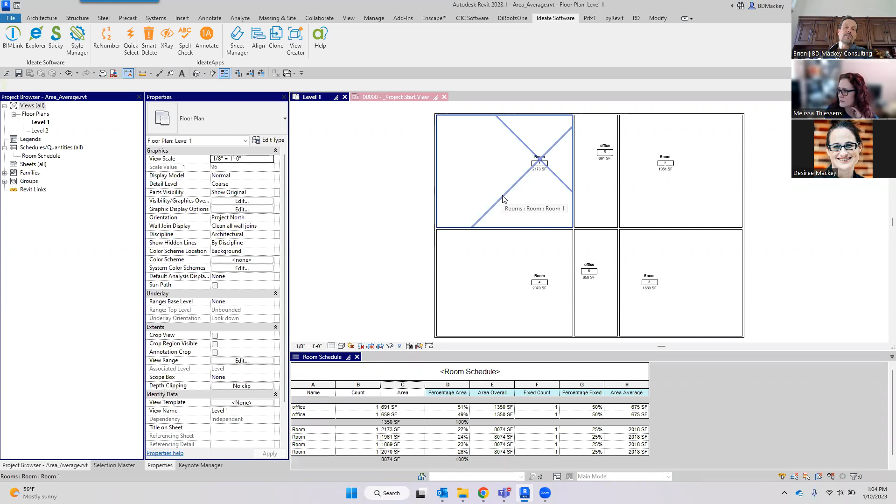And this comes back to that post from over a decade ago: you can't use the overall totals in these things. So looking at this, I've got four rooms called room, and 2 of them called office, right? I've broken those down in my schedule. In my schedule, I am sorting and grouping it simply by the name, and then I've got some totals to calculate the totals of each of those.

Like when we're doing our occupant load calculations or plumbing calculations or anything in Revit where we want to use the overall math to figure out a calculation, we can't do that in Revit natively. So to get this to work, we actually need to figure out what percentage of the overall grouping this 1 square footage is. Once we know that percentage, we can then multiply by that percentage to get the overall square footage.

And it does look a little bit weird when you start looking at this: oh, gee, I see 1350. That's the sum down here, right? You see that on every single one of these. But again, if I go to sorting and grouping and uncheck itemize every instance, now you're going to see, oh, here's the whole overall 1350.

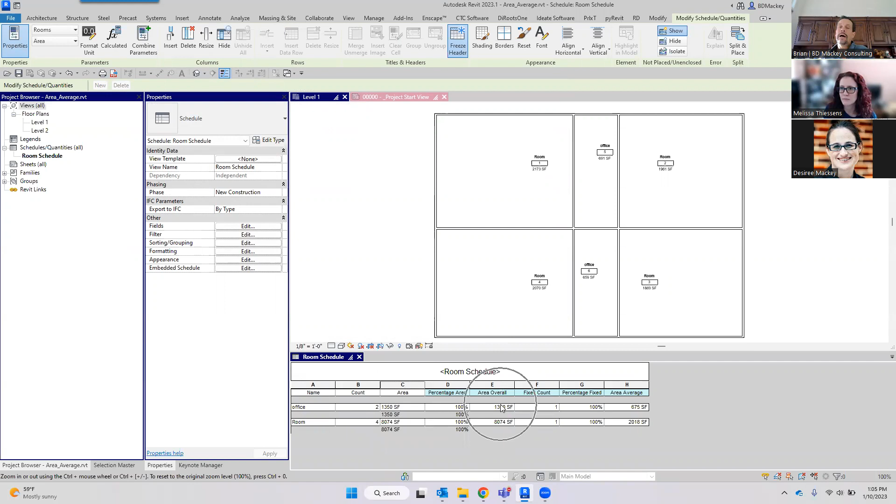Now I see that 1350 here. So in the overall area, I'm summing the totals. This one, I am not. So the question might be, how does that happen? Well, the biggest thing you need to do in Revit is create some calculated values.

So all of these last 5 columns you see here that I highlighted in blue, these are all calculated values in the schedule, right? So the schedule is only pulling out the fields, name, and area. I pulled out count as an example, how we can't use it for the next step, but the only thing I'm truly using is name and area, right? So we then have to come in here and figure out what percentage of this when we go in there.

So when you go create a shared or a calculated value, give it a name, and then if you've ever noticed, you can choose between formula or percentage. Now, once you choose percentage, the first thing is going to be any of the other calculated values you have or parameters that you have inside of here. So the first of is going to be, hey, choose from one of those parameters. And in this case, I want to know the area.

The by is then going to either give you grand totals, or the option you get here is how you're sorting and grouping it. So this is one I know causes a lot of people confusion. It's like, oh, how do we sort and group, or how do we get a value for by other than grand total? Well, if I jump out of this real quick and go back to sorting and grouping, if I sort and group it by name and then by

area, you'll see that now when I go back to that fields tab and I go into that percentage, I don't just have name and grand totals, I have grand totals, name, and area. And so coming through here and looking at this, like, oh yeah, it's the grand totals, it's the name, it's the area, right? Again, if I cancel out of this, go back to the sorting and grouping and get rid of area and say none, then in our fields tab, for any of the percentage calculated values, we only get what it's sorted and grouped by.

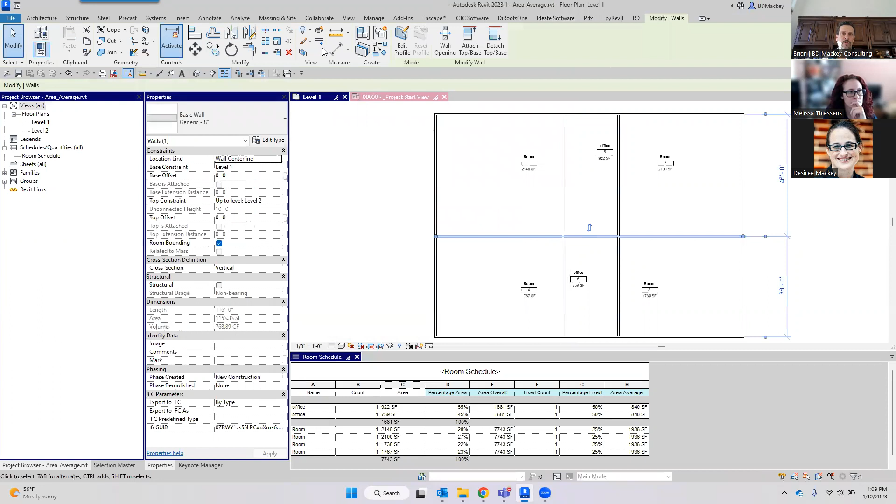And if I were to come in here and draw in another small little wall in here, let me just go say create similar, create similar is right there. I keep missing the button. I'll put this in here. I'll go ahead and copy my room down by control dragging, right? So now I've got a new office in here, and you can see those numbers automatically updated. But again, now it's still giving me that overall total as we start to come through.

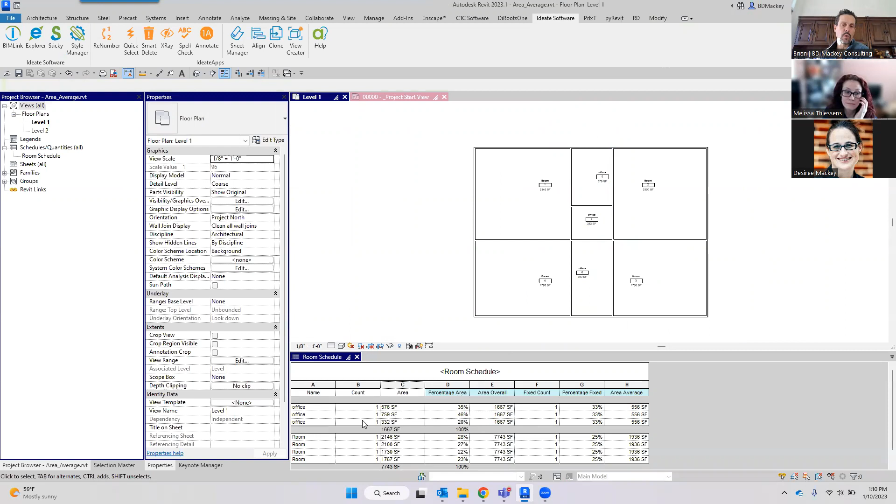So now that we've got that, when we get there and set that up, that gives us that overall area. And that's one of those things if you wanted to, if I go back to my sorting and grouping, click down here, go to my sorting and grouping tab. In sorting and grouping now, if I uncheck itemize every instance and hit OK, you're going to see I'm going to get the same for the overall total for all of the areas as I'm getting here, like you saw.

Or in Revit 23, I can't remember, did they have this in 22.1 where you get the varies in there? I think they might have. If I go back to my formatting and I say I don't want area to calculate totals and I say no calculation, now it's just going to say, hey, this varies, but the overall area is this as well. So however you want to look at it, you can do that.

So then to figure out the average of those, what we needed to do is use the count field. Unfortunately, we cannot in Revit use count as a calculated value, just like we couldn't do with the sum of all of the areas, because each one is an individual element. Count for each individual element is always one. In this case, I particularly wanted that. So what I do is I have another calculated value, I called it my fixed count, and the formula is this is always one. There's one room every time I place it. So regardless, I'm going to give myself a single value there.

So the only reason I needed to use the fixed count or to have a number 1 in every single one of those is I now need to know, again, what percentage is this. So again, I'm going to go and uncheck itemize every instance. And then I'm going to go back to my fields tab and show you the next one. So the next formula is percentage fixed. And again, I'm saying, take that fixed count, the number 1, and what percentage of that is, by what I'm sorting and grouping it.

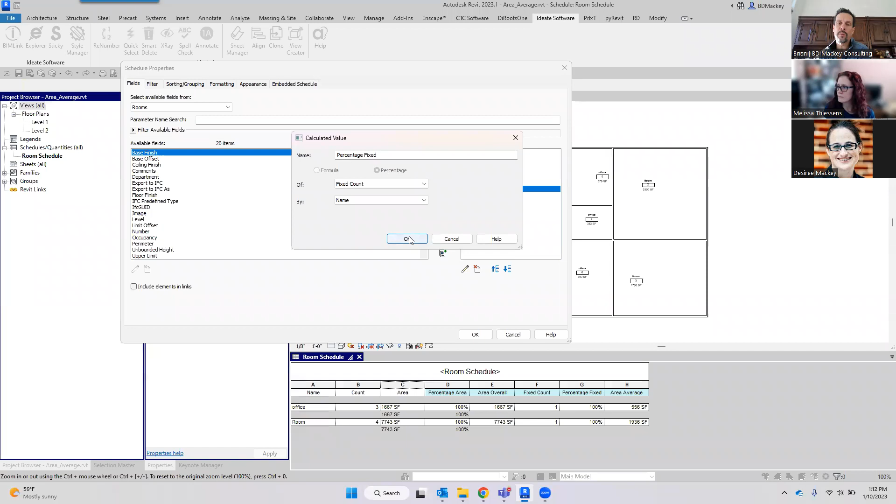So even though this is a number 1, what is that percentage of however many of these are in the sorting and grouping? So if I say okay to this, you'll see in this case I have 3, so it's 33%. In this case I have 4, it's 25%. Again, if I were to break that down and start adding it, those numbers are going to change. The reason why I need this one is for the averages, right? I need to know this percentage is 33% of the 1667. So what that's going to tell me is the average, regardless of what your square footage is on each individual one.

So again, I've got the percentage fixed, which I did the same as the percentage for areas, but it's just 1. And I guess I could have technically done this different. I could have went into that field. I just thought of this off the top of my brain. Instead of using fixed count here and percentage fixed, I could have just said no, because I needed it here. Never mind, I lied. Scratch that.

So I've got that. And then I come back here to the area average. Again, same thing. I'm just saying now take the area overall, multiply it times the percentage fixed. So take this overall area, the 1667, multiply it times whatever this is, and then that's going to be the average area.

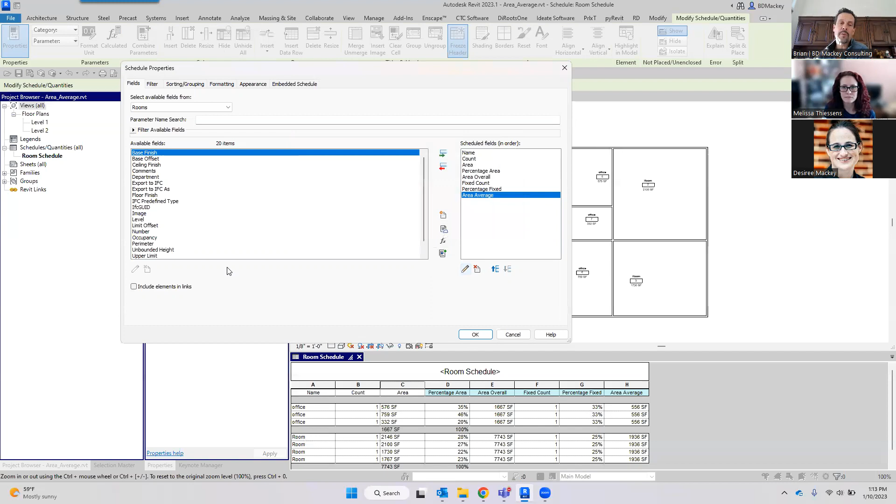If we really were getting into something where we've got typical unit 1s and we want to know the average area of that, not of each individual one, and we were setting this up on a printable schedule, I'd go back to my sorting and grouping. I'd uncheck itemize every instance, hide every single one of these columns. Boom, boom, boom, hide. Now I'm just looking at, here's my rooms, here's my offices, and here's their average square footage. So you can absolutely do that, pre-build it in.

I did a little Google searching, and there was a whole bunch of people saying you've got to use Dynamo to do that, you've got to run the Dynamo script. And I'm kind of like, no, you actually don't. You just need to come in and use percentages. So it helps to be married to somebody who knows math, or to know people who post math formulas in the forums quite often.

And I'm still trying to buy time because we only have one question so far. So, Melissa, how else do you guys kind of use this stuff in your template when you're starting to work on it?

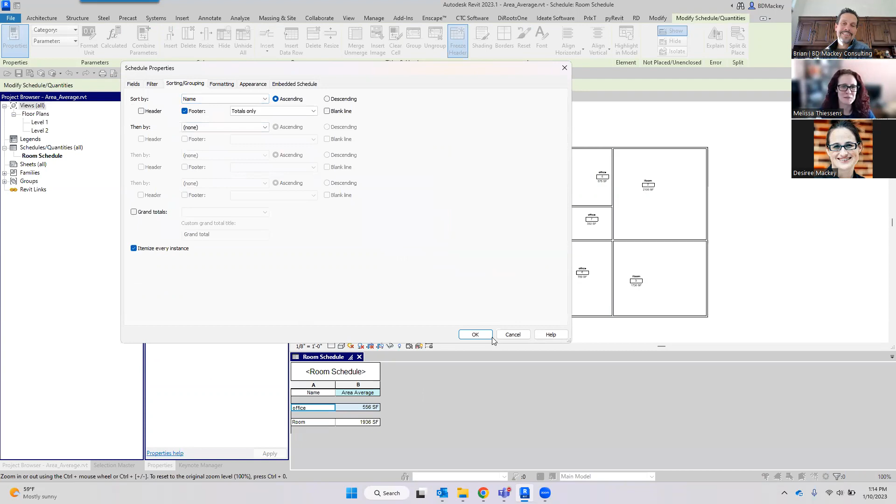Very similarly, but also with Dynamo, because John. You also use Dynamo because, well, not all of us have John. Yeah, it also helps to work with a John Pierson when we're talking about that and getting into it.

No, we do very similar in our code stuff, and have that stupid count parameter. The fixed count parameter, you don't necessarily need all of the time. Like if I'm just trying to figure out the overall area, that's not one that I needed. It was funny, I did this in one of my fields and I had it in there. I went back, looked at my schedule, and I'm going, I'm not actually using that in any of the other formulas. Why did I put it in here? It was just such a habit on certain things you do, it's like, yeah, I needed that. So I basically do these 5 fields all of the time, I just put it in there, and I'm like, wait a second, I was only using these 2 fields, I didn't need that fixed count.

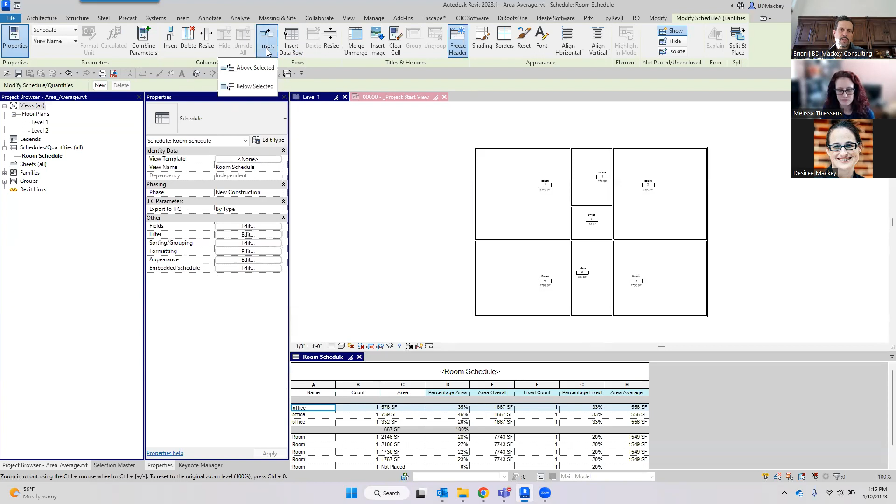But again, I want to reiterate to people that you want to put some sort of note, like if you have this in a working schedule, add a new row up here or something, insert below, put something in here. Do not change the grouping, sorting, whatever. Make it something big so people understand, hey, this truly is what we need to be doing so it doesn't break the schedule.

Since we did mention John Pierson's name, I do want to mention, and Melissa was jealous because John released this like a day or 2 ago, and I've already had 2 updates to it because I noticed a couple bugs. I always get asked, how do I get my colorized tabs? You might notice when you look at this that I've got the colorized tabs, but John's latest update colors the properties in the project browser to be the same, so if you switch from project to project, you actually know not only by the tab you're in, but by the property.

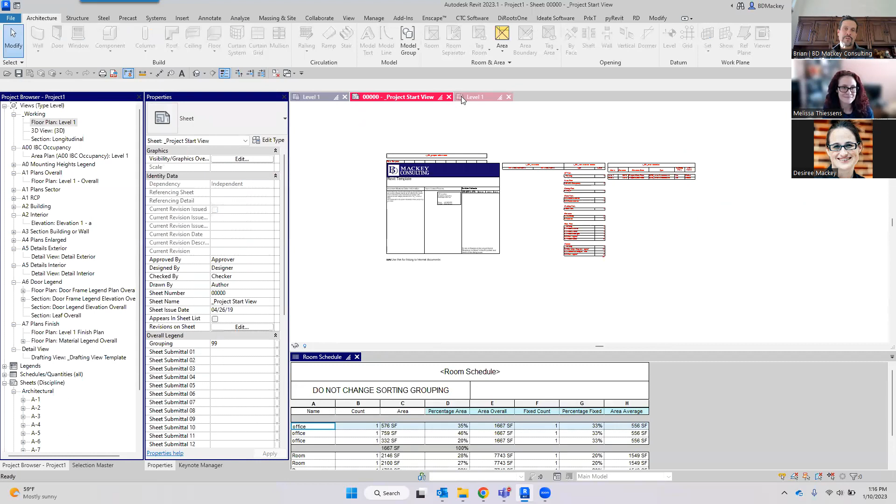Sure, it's not working. Is it because I tiled my views? Uh-oh, let's see if it's because I'm in a sheet view. Oh, I found another bug for John. Well, this is recording, so what minute are we in the recording? So I can just give that to John. Let me get rid of this and see if it goes back to being pink.

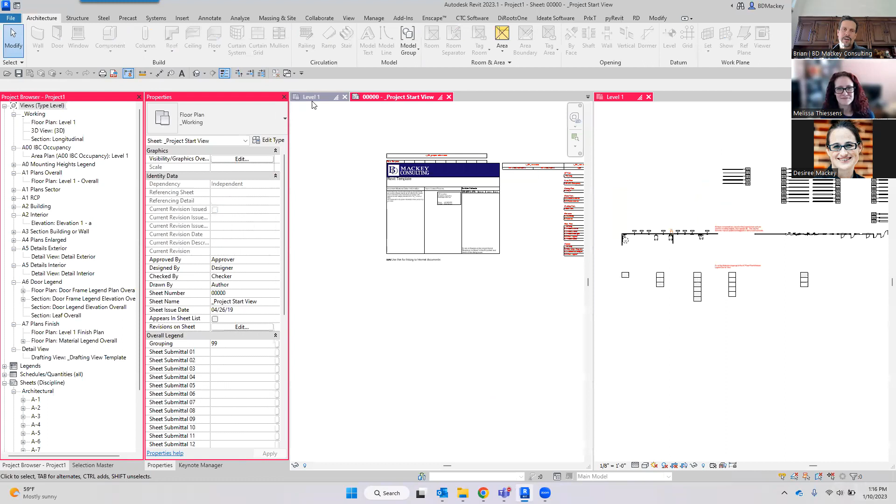Oh, it was literally working right before I started Revit Radio. No, there it goes, so if you're tiled, it's not working. It could be Zoom, we found that Zoom has been messing with all sorts of stuff lately. Okay, well, let's tile this up and let's see, tile it up over here, go back to the blue one. Yeah, not working when it's tiled. So maybe it's a combination of tiled and Zoom. Not sure, but I'll be having a call back to John, maybe I'll get a third update in 3 days.

It does go through and change it. I also have other add-in utilities that give me tabs down here, and you'll see it's still using that same color-coded border. Something about this was actually really nice looking at it, getting into it. This is very cool. I can now just use the tabs and know which properties of which one I'm getting into as I change out my different projects.

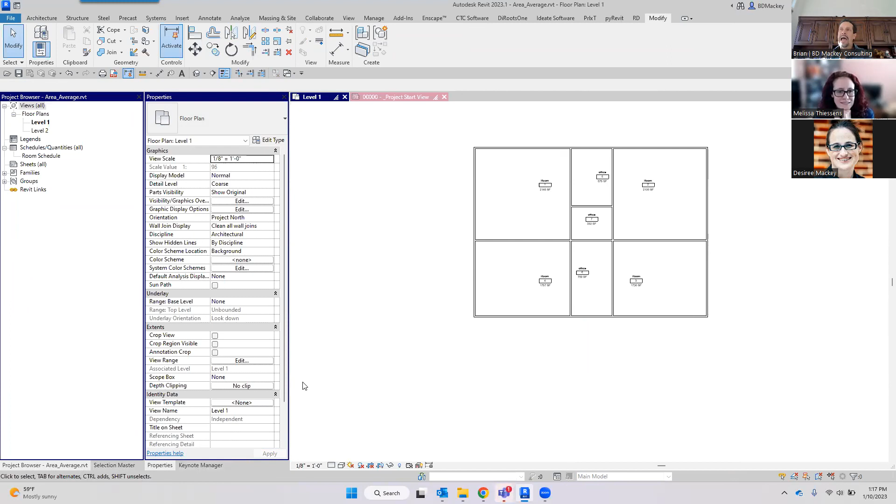Because I've done that before, it's like, oh, I'm in this project. Wait, ooh, now I got a 50-50 split here. Sweet. Yeah, I did. It also could be the fact that I have this other add-in utility that's adding tabs down here too.

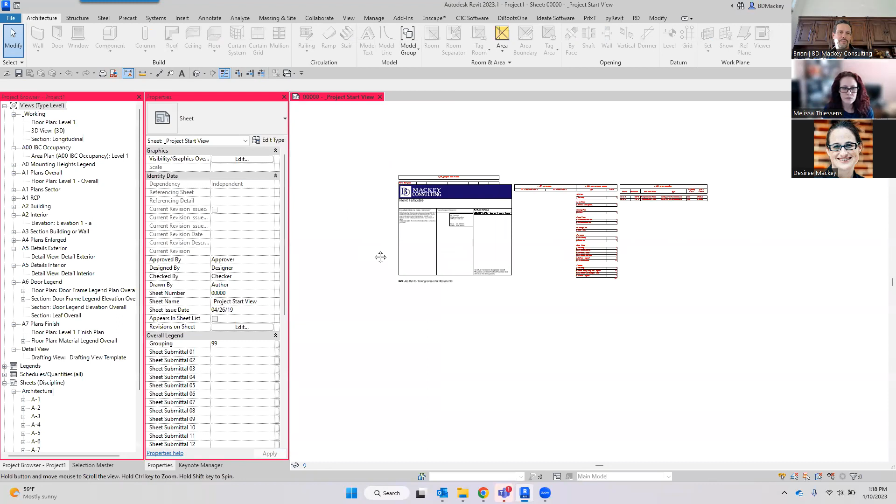Okay, so let's go to floor plan. Let's put an architectural column down. I rarely use architectural columns personally. Usually for me, unless it's going to be some sort of specific case, I don't get why they have a chamfered column here. To me that should be structural. Out of the box, it's kind of odd.

Are they not allowed in your household? Yeah, it's like if you're doing a metal clad or a Doric column, I kind of understand that too, but the round column and the chamfer column, I don't use those ever, just because it drives me crazy that that should be a structural column.

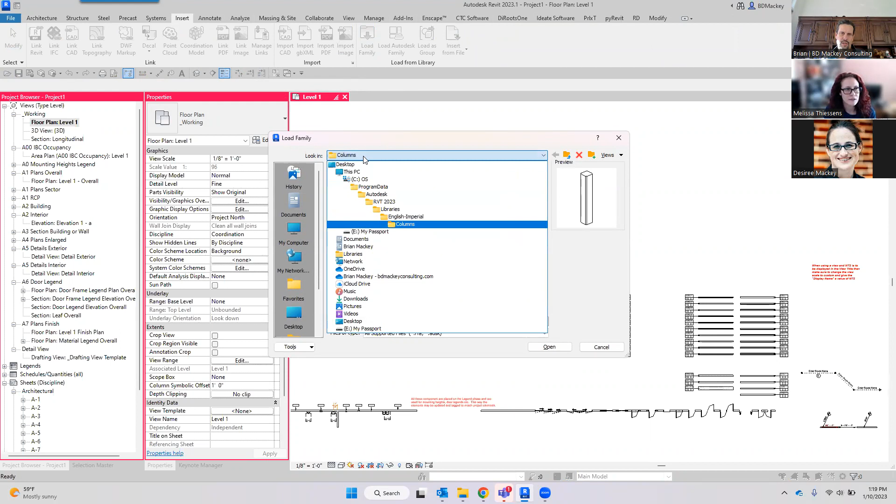Am I trying to do that again? Insert load family. I won't do it from the chamfer column. I am under just columns, right? Yeah. We'll do the Doric column. Okay, now we'll go back to architecture, we'll go to column. I swore I clicked column architecture before. I might not have. Cool.

Oh, did you guys ever notice this bug as well? Have you ever tried to place a column and it doesn't show up in your preview? I don't know if everybody has this problem, it's mostly with structural columns. It's because your level is not at 0 in your project environment. A lot of my clients start their level 1 at 100, and when you go to place a structural column you do not see the preview of it until you place it. It's because your view range is below the level you're on. It looks at whether show family pre-cut in plan view is turned on in your structural column family, and if you're placing it on something other than 0, that will not display the preview of the column. It's a pain in the ass. It is a bug.

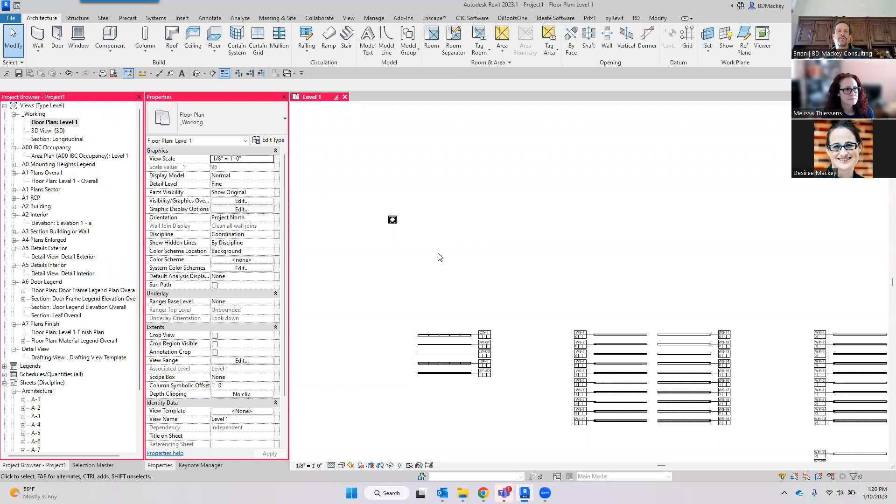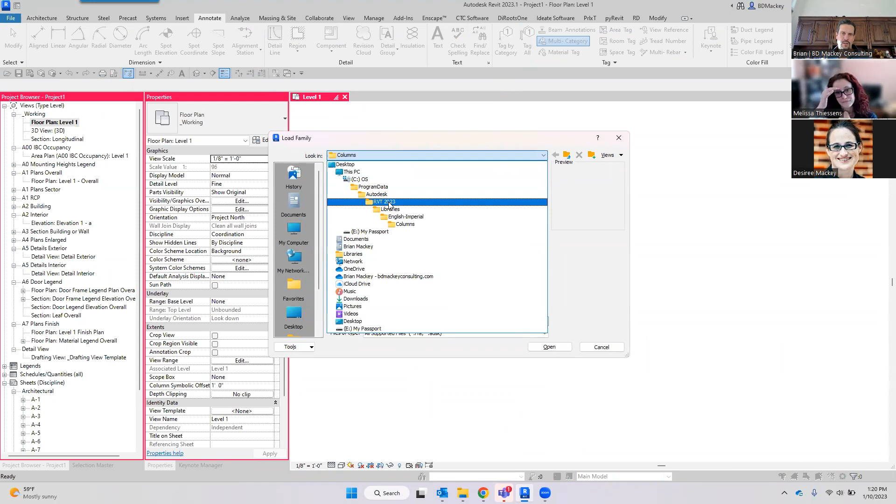Okay, so we got this one here. We're gonna go ahead and try to do a multi-category tag, get back to the original question. Tag, where am I going? Annotate. Multi-category tag, sure, I don't know. Is there an out-of-the-box multi-category tag? I haven't looked. Multi-category tag.

Okay, so it is working for me. Uh-oh. So this is a multi-category tag, I got it working for me, but I have no idea what this is tagging. I'm assuming probably comments. No, that's a type parameter. So what did I change? So it's the type mark. So what must be the problem, Rowan, is you're selecting something in the multi-category tag that doesn't exist in that family, would be my only guess.

He's blaming it, he was in Revit 22, not Revit 23. Oh yeah, totally blame it on Revit. Totally, it was just a glitch in the matrix.

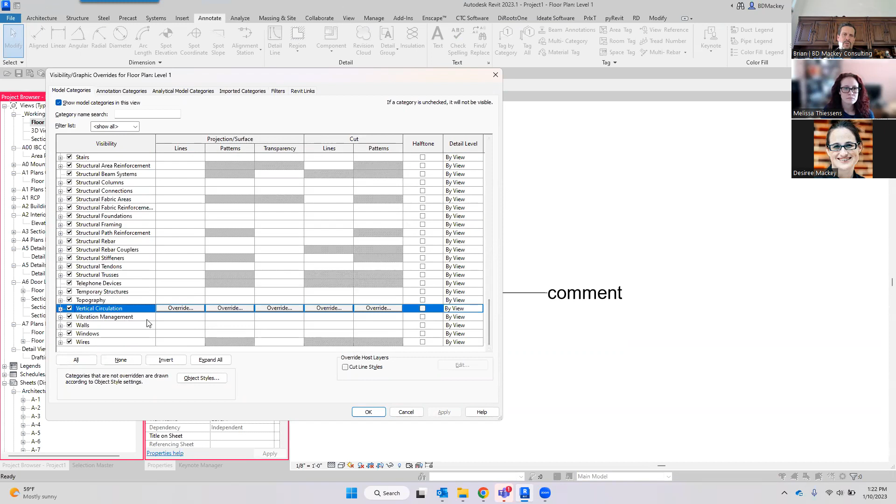Yeah, I'm not sure because I thought they were still there. They did add more categories to it, and somebody actually posted recently that the multi-category tag does not pick up on a lot of the new categories in Revit 23. In Revit 23 we got things like vertical circulation or something like that. I did notice in one of the Autodesk forums that somebody was saying some of these new categories don't pick up on multi-category tags.

Not sure, maybe they're doing the same problem, Rowan. I didn't really follow that post any further. Someone commented and I was like, huh, interesting.

It's working for me. I think you just need to check your tag and make sure it's pulling out a parameter that exists within that family. Also, I wouldn't say it was a thing that didn't work in 22 that now works again. It might have worked in 2022, but not 22.1, or 22.1.1, something like that. It happens.

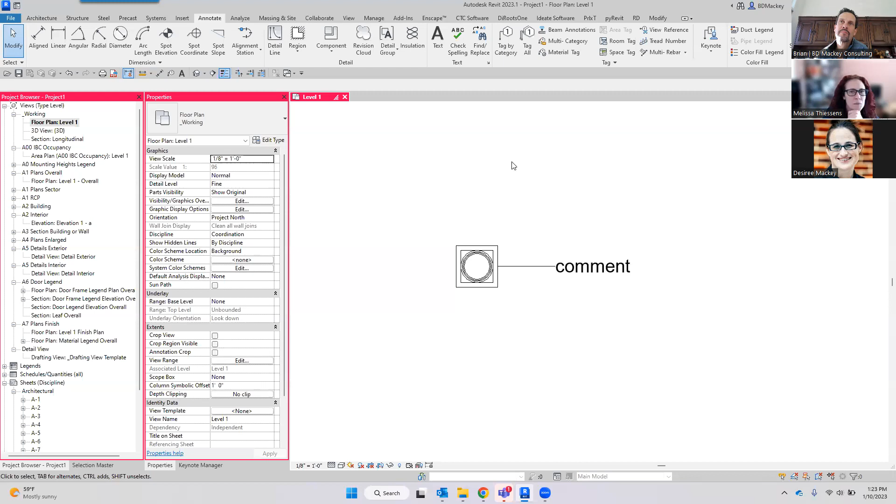Maybe you should open up 22 and just see if this thing works in 22. I can do that while we're answering the next question. I'll go ahead and open up Revit 22.

So what's our next question? Why is that taking forever and a day? That's the problem with having too many add-ins — you get too many add-ins, it takes so long for Revit to open. That is true.

So what's our next question while we're waiting for that to open? Okay, we'll go to Rick, who just posted another one: does the recipient of a Revit project file need the keynote file for the keynotes to appear correctly?

No, not until they try to manipulate something in that object. For a lot of my clients, they have the Revit keynote files — I open them up on even BIM 360, and the keynote file is not on BIM 360, it's on their server. I will still see all of the keynotes properly until I attempt to manipulate something, then it'll just come up and give a question mark. But once they open it again, it obviously repairs that and fixes it. So no, technically you don't need to have that keynote file.

Now, I don't know if that file has been transmitted — whatever we call that, transmit a model or whatever — if they do that, I'm not sure what happens. I don't even know if that brings the keynote file along when you do the transmit a file. But no, I've done it and seen the stuff come through just fine.

I've even opened up my own thing where I've lost the keynote file. I moved folder structures or whatever, and go through saying, oh, okay, it can't find it. And I still see the keynotes until I go to manipulate it. So you should be okay without having the keynote file for them to appear correctly, but I'm not sure at what point Revit's going to regenerate those things and say, sorry, I'm just going to give you question marks.

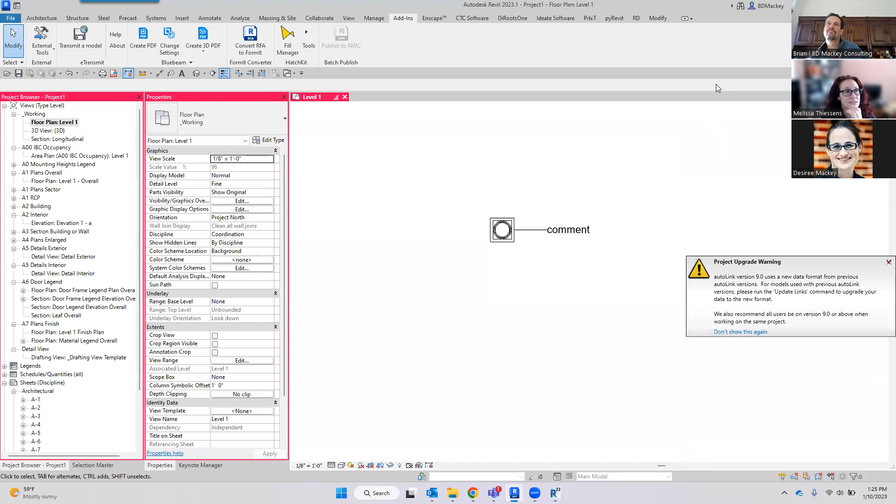Cool, so 22 I think opened. So we'll start a blank new project, not with the construction template.

Oh my God, I must have broken my INI. What? I thought I just deleted the construction template out of there. It's one of the worst templates ever, because I set my phases up for superstructure and all of that, breaking a building down.

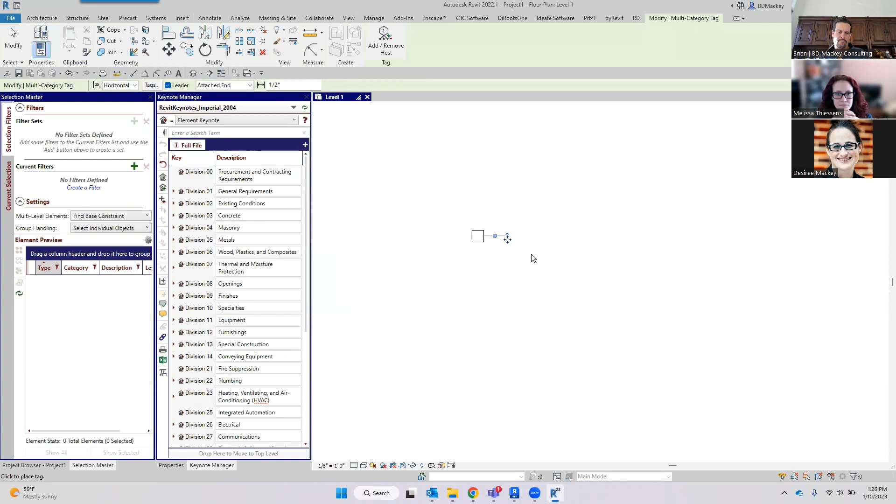Come on. Column, architecture, put one. Tag. Multi-category. Sure. Yep, just do your own. Still working for 2022 as well.

Bummer. Maybe, well, and then you can run it down. It could just be that file that you were working on. It could be the tag, could be your computer, could be the day of the week.

It could be you. I know, Dylan, I'm just trying to be nicer. It could be. Oh, he gives me enough crap when he asks questions on Revit Radio. All right, fair.

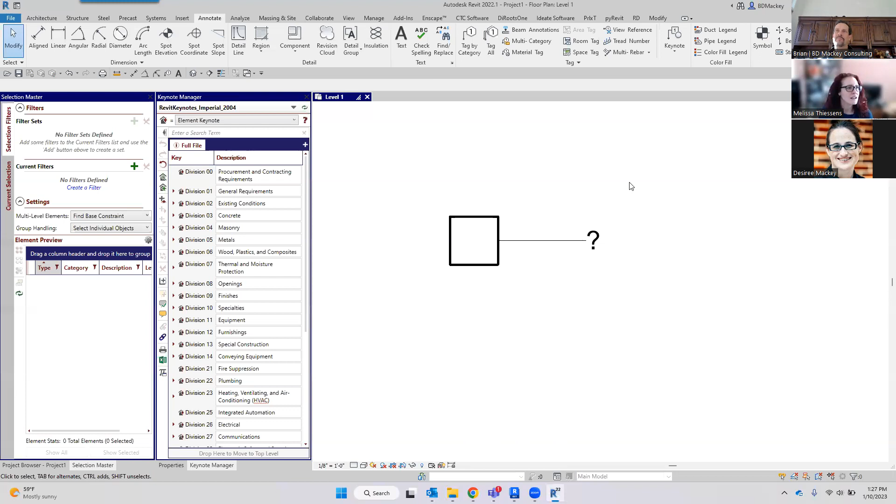Oh, look. Well, it's a good thing that you got 2022 open because we have another question from 22. Well, there you go. So Christopher's asking, is there any idea in Revit 22 when you use keynote tags, when you add a host, the leader goes out to the middle of nowhere and you have to drag it back to the component you were trying to add?

So it doesn't necessarily have to do with the keynote tag. The reason why that's happening is when you are going to tag, right here, you have your tags set to be attached end. And when you set it up to be an attached end, Revit looks for the quadrant of that family, right? So you can see that I've got this tag here. This tag is already there. It's been set to be an attached end, not a free end.

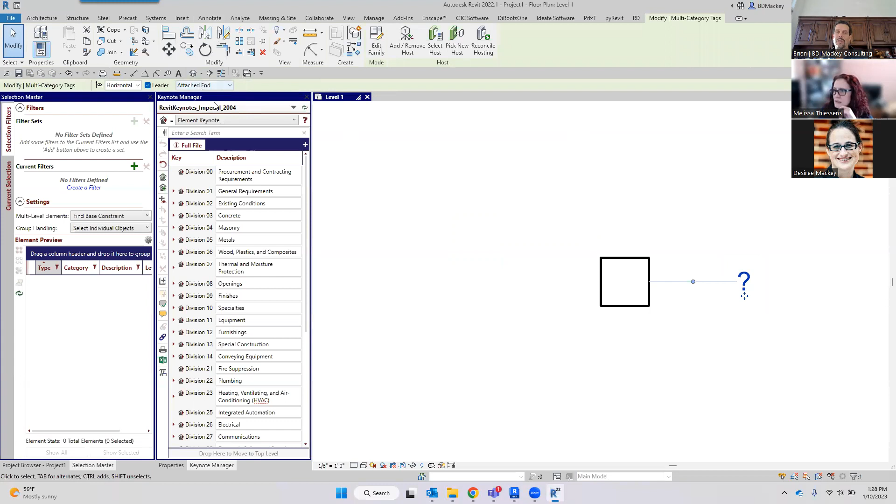And if I come in here and edit this column family, I'm going to go into a floor plan to do this. Use floor plan, ground floor. If there is something in that family, usually a reference plane that is outside of it, or it could be a reference line, whose definition is set to be strong or weak, medium, or named, it will think that's the extent of the family.

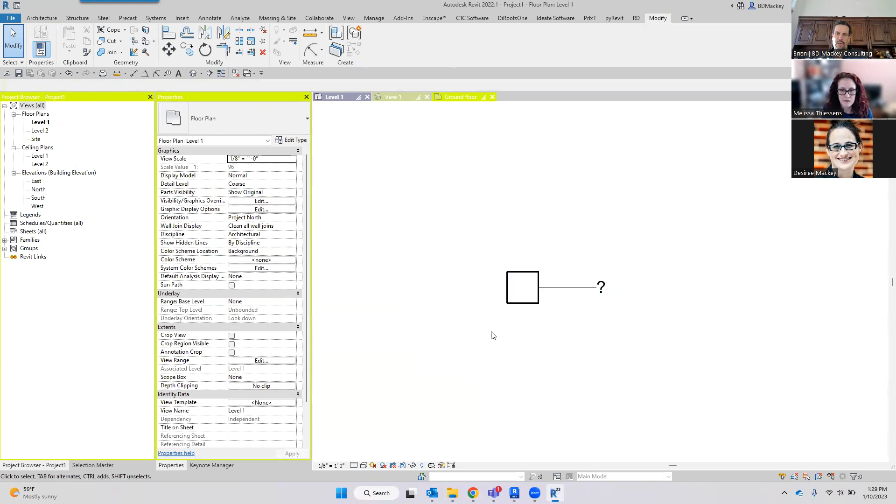So if I came in here and drew a reference plane, I believe a reference plane will break this as well. I take this reference plane here and change its properties to be a strong reference. I'm going to go ahead and load this back into my project. I'm going to override it. First off, you can see I'm grabbing that stupid column family. Wait, where is it? It's way up here. And I'm going to try to retag this.

And it might not be a reference plane that's doing it. It could be a reference line, but let me go try to tag again. Let's just do tag. Make sure my tag is attached end. I probably don't have a structural column tag loaded, so we'll go to multi-category tag again. Or you said keynote. I'll do keynote tag. I changed it to be attached end, click it here, boom. Okay, so that's not doing it, cool.

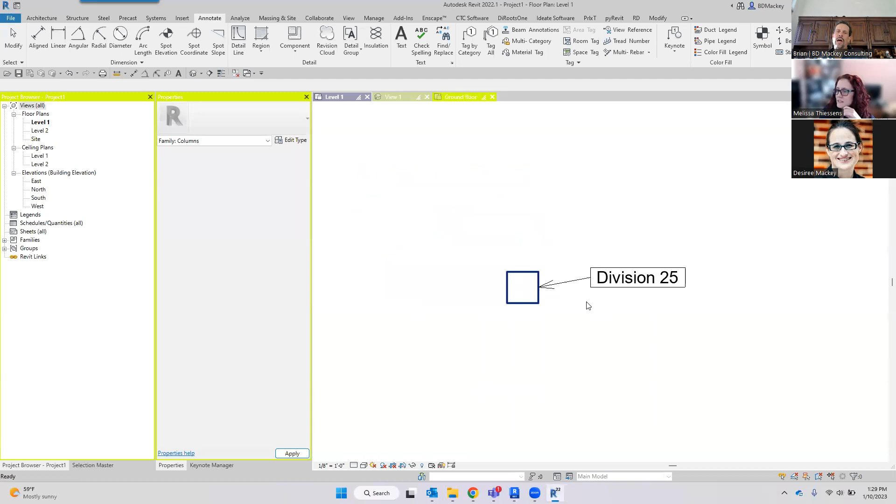Let's try it with a reference line. Create reference line, change it to be a strong reference as well, and load this back into the project. The reason it's doing it is there is something in that family that is saying, hey, I mean, you can see that the tag actually moved, but I don't know why it's not giving me. No, I did not double click you. I just selected you. I honestly don't get why it's doing that. What is it? Possibly because something's extruded.

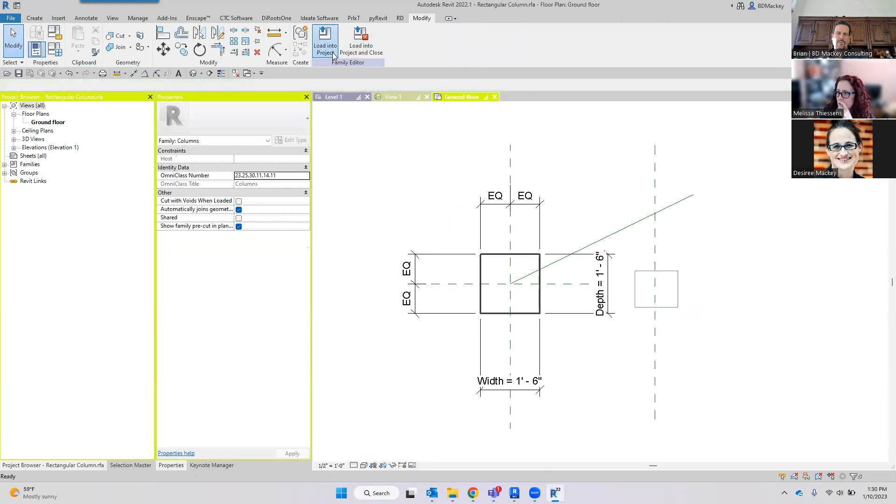It used to do it with reference planes. What if I go create an extrusion over here, finish it, but then say that's not visible for whatever crazy reason, and load that into the project. Nope. Still not doing it. I'm really confused. That usually breaks it. Maybe it's because I'm doing it with a column family and not something else. Let's try the cheesy desk. See if I can break it with a cheesy desk.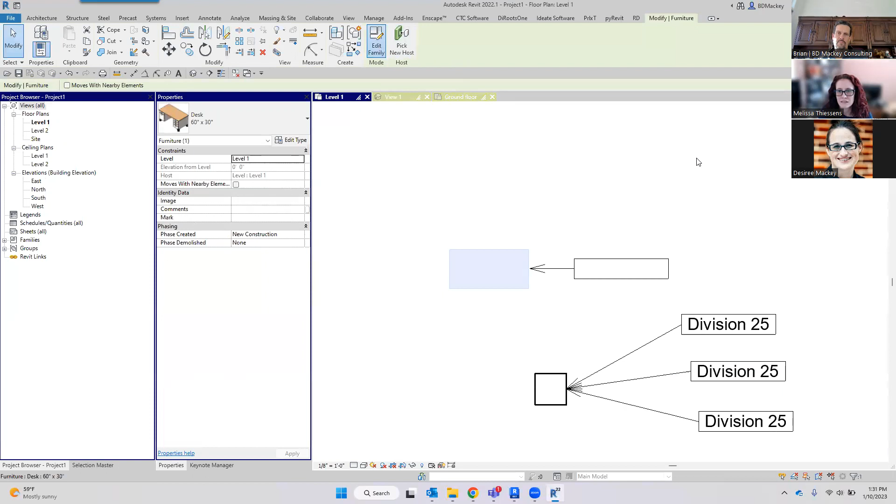And while you're doing that, some in the chat are talking about showing it to somebody else. I can confirm that that works, even for me. By the time you get annoyed enough to say, hey, watch this, it keeps doing that, it stops. Whatever it can do to make you feel like an idiot, I think that's what it does.

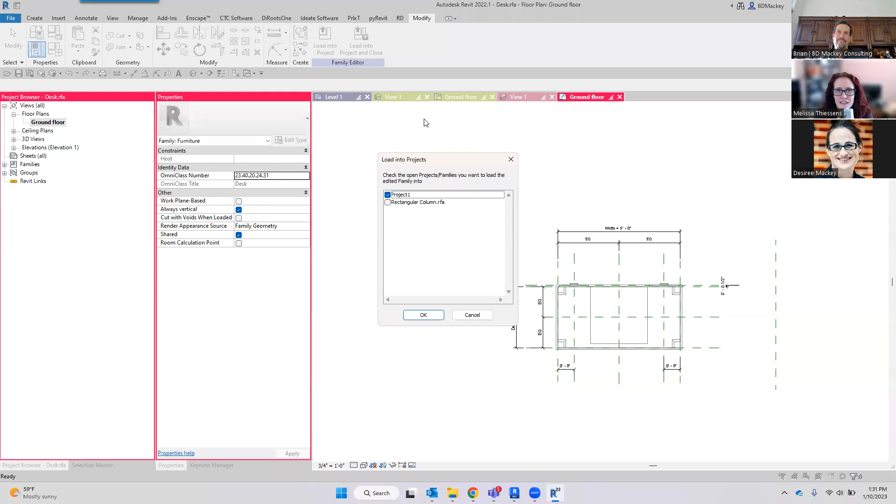Yep, load into project one. The tag's moving, the extent of the tag moved, but the leader isn't. That's weird. It's usually something to do with that, and there's something inside the family that's outside of there. Oh, you're talking if you hit add, but you can only add leader in 22 to text. You can't add leader to keynotes. Sorry, Rick said it's secondary leaders to tag a second element.

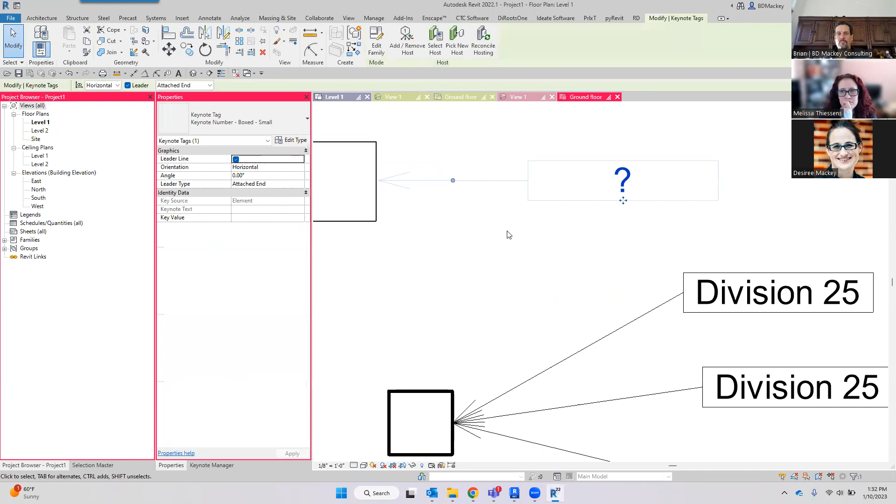You've seen the same issue. I've seen the issue too. Usually it's when I open up the family, there's something rogue off on the side of the family that's causing that to happen. Of course, I'm trying to break it now and I can't get it to break, even though you've been having it break for you for years. It's usually something like that. I don't know why I can't get this to break. That usually breaks it.

Because FreeEnd lets you move it anywhere you want. Oh, that's a new tag. So if I go to FreeEnd, I can move it. Maybe it's just when you're tagging it with the FreeEnd. Maybe that's what I'm missing. Create similar, FreeEnd, tag this, not usually. Yeah, I don't know. I got nothing.

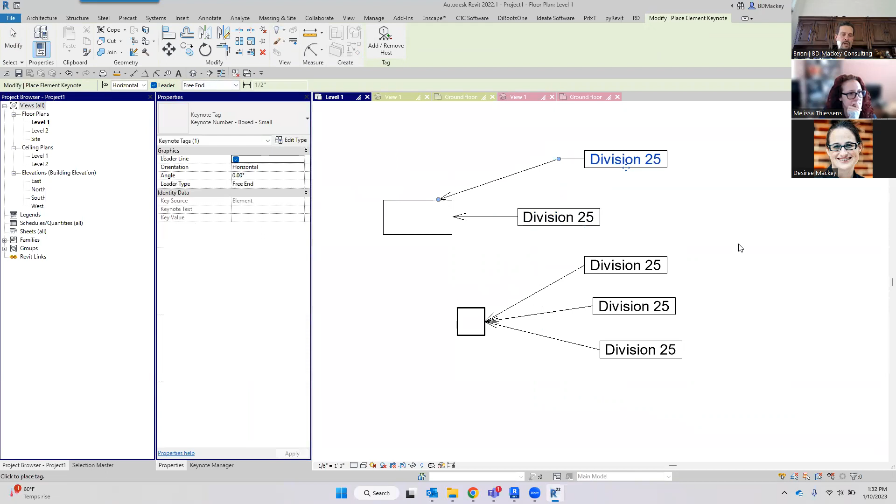No, add remove host. That was in 22. Gotcha. Is that a 22 feature? I totally thought that was 23. Add remove host, do this one. Yeah, I can't get it to break. Should really break for me. Add remove host, this one.

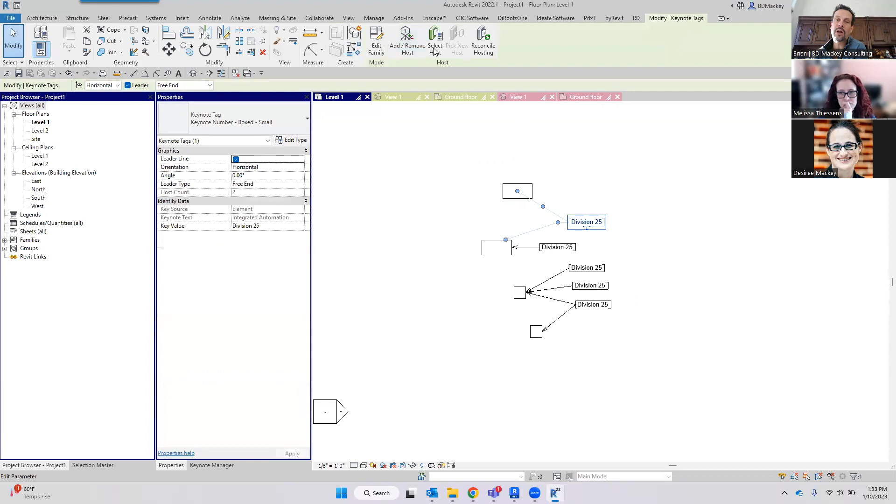Cool. Well, I would think it'd be breaking. It's not. But yes, I understand what you guys are talking about. I've seen that. Like I said, I would verify in those families that there's not something floating out there. There's not a reference plane or reference line that has a strong, weak, not a reference. I have not seen that in doing multi-tags where you can add remove host. I've not seen that happen personally. I'm not saying it's not, so I haven't had to go try to troubleshoot that one yet.

Trying to change these around back, got nothing. Can't get it to break. I hate it when that happens.

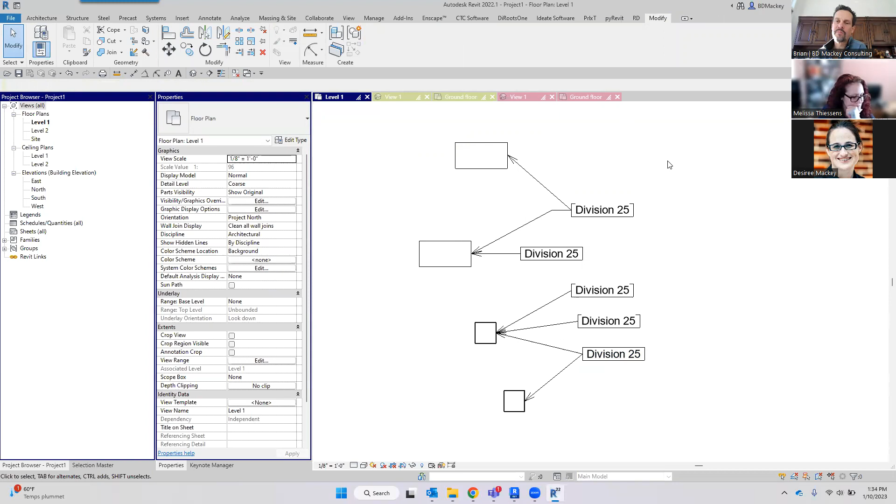So what other kind of questions do we have here? So our last question from Anonymous is how do you export shared parameters that exist in a project if you don't have the original shared parameter file? So it'll be the same if you're in a project or if you are in a family environment. It doesn't really matter. You just need to get to where those parameters are.

So in the project environment, you're going to go to Manage and you go to Project Parameters if it's something that's within the project. You'll see these are all of my crazy parameters for code, etc., that I've added inside of here. Well, if you don't happen to have one, when you select this and you hit the edit parameter button, you will get the button here to export. Mine is grayed out because my shared parameter file has this one in it already. So if I cancel out of this and I go up to my shared parameters, I'm going to point to a different shared parameter file.

Sure, we'll try that one. No, that one probably has it as well, but we'll see. Manage project parameters, come into here, grab this, say edit. Cool. Well, that client has my shared parameter in there as well. But so normally you would just get this export. And then once you run that export, if you then go open up the shared parameter file you pointed it to, inside of there, you will get one here called exported parameters.

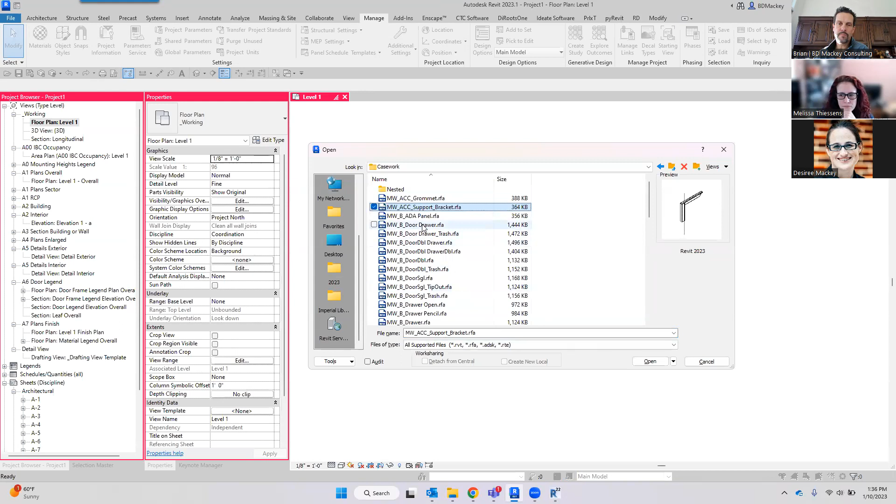So if I open up a family, the only difference is you're not going to go to manage project parameters. Oops, not the button I wanted. You don't get project parameters up here. So what you're going to do is go into your family types and find something that is a shared parameter. You won't actually know if it's a shared parameter or not, but if I hit modify, it'll say shared parameter, and then I would get the capability to export that.

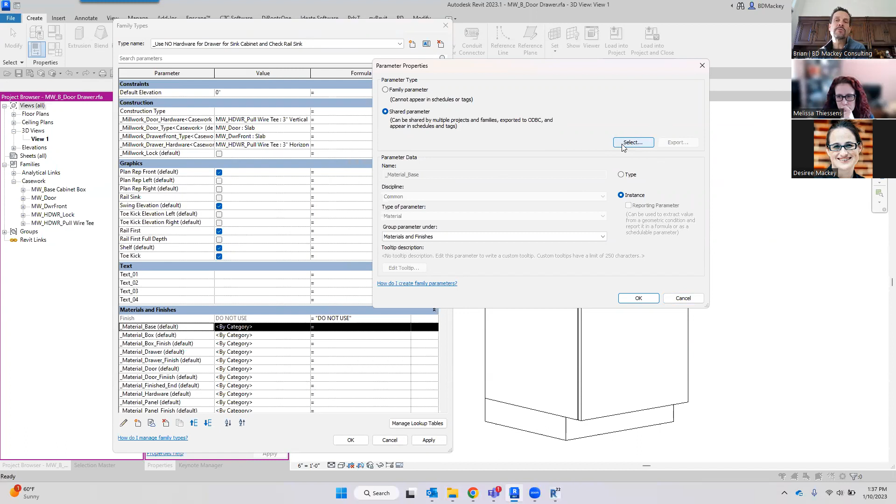In the family environment, you can also select to swap it out if you wanted to swap it for a different type of parameter. So in the family environment, you can swap it out to another one. In the project environment, select is grayed out. That doesn't exist. The other way to do it is, I think, the DiRoots tools.

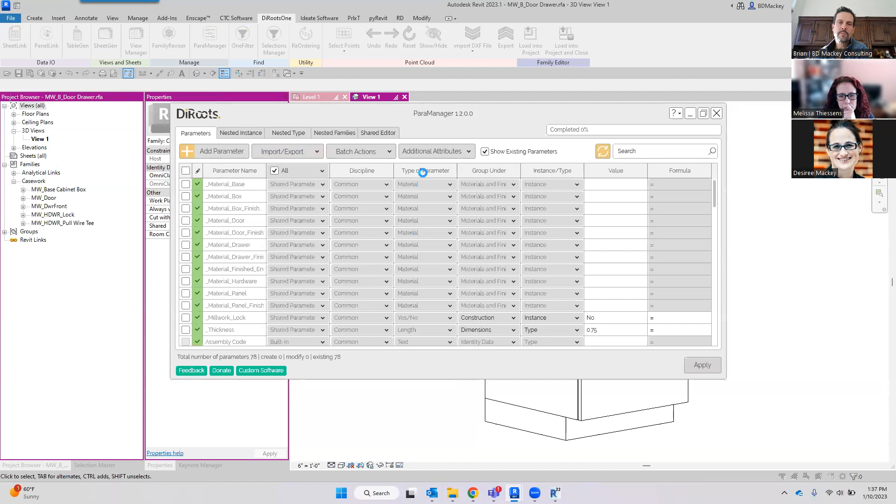If I go into the DiRoots tools and into ParaManager, I think it'll come through here. This is a free utility. It'll start saying, look, these are shared parameters. But then you can go through here and say, I want to export shared parameters. So the DiRoots tool, if you need to do more than one, rather than going through the whole little dialog box, you'll see it's going to come through here.

All of these are the shared parameters. So it's not pulling out any parameter that is not a shared parameter. Then you can select all of those and say export. It'll export it out to a TXT file that you could then import into something else. You'll see, here's my TXT, and I could import those into another thing. Try to find an add-on utility. I think CTC has one. I don't know if theirs is free or not.

Because the other thing that's a real pain in the ass about shared parameters is you can only do one at a time. If you want to bring in 10 shared parameters into your project, bring in one, bring in another, bring in another. It's kind of a pain in the ass. But if you've got the whole import export, you can go in here and say, I want to import a shared parameter file. Grab that shared parameter file, which would be here for my shared parameters. Then it'll show all of them, and you can bring them all in. It does show you if they're in the project or whatever, and what type of grouping they are.

But now I can say, let me go ahead and import those, and now all those shared parameters are going to be inside of here. So I do suggest getting some sort of tool to do that. It makes life much, much easier when you get into it.

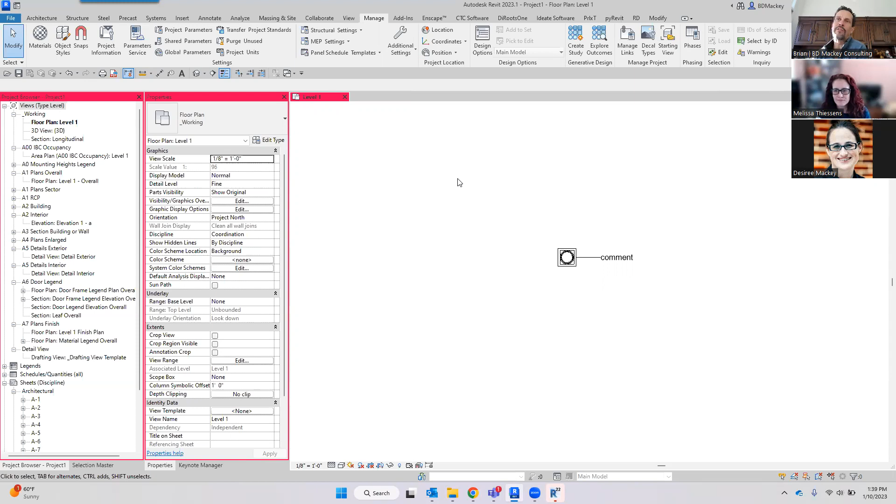Yes, a comment about using schedules. That's what I like to do too. Yeah, and that was going to be my other thing. So for all of my architectural clients, who are usually the lead, they usually have 15, 20, 30 parameters for everybody to organize their sheets so they can actually get them to schedule properly.

So the other thing that's really, what was that, Melissa? I said 15 or 20. That's impressive. Just for sheets.

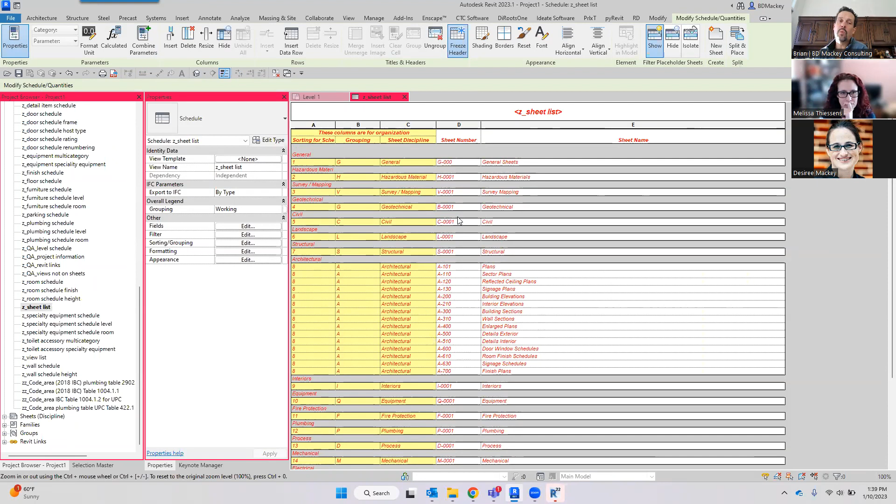Well, actually, I think one client is 45. So one thing on that too is if you get into something like, not the view list, I wanted the sheet list. I don't even know if I have one on here. Sheet list. So in my sheet list here, I've got all of these parameters for discipline, grouping, sorting, schedule, those types of things. One of the easiest ways to do it is to literally come in here and say copy to clipboard. I now have this schedule. Again, those were shared parameters.

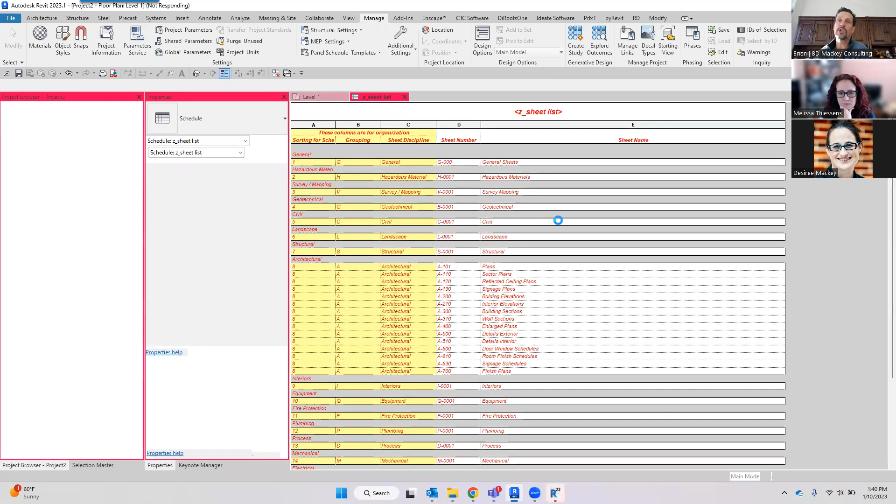If I go start a new project, maybe I shouldn't have closed my other project. But if I start a new project, then I can just paste that schedule. There are no sheets in this new file, so the schedule is going to be blank, but it will bring across those parameters, shared or project, into this file as well. So it doesn't matter if they're shared parameters or project parameters, anything within that schedule that's within the project, it will bring across.

Now, if I were to bring in my schedule for my millwork, it's not going to bring any of those parameters across, because those parameters are all shared parameters from within the family. So you'll see I've got this, and now if I go to manage project parameters, those three parameters came across, giving my sorting, grouping, and discipline.

So yep, schedules are a great way to do that as well. Again, in the project world, it doesn't care if they're shared. I think these are actually all just project parameters. I don't believe any of these were shared parameters, but it would work the same if it was.

Then just to throw it out there, since we are in Revit 23 and I have 20 minutes to kill and there's only one more question, Autodesk did bring in this new tool on the Manage tab called Parameter Service. In 2023.1, I think it came out as an introduction. They have this thing up here called Parameter Service.

When you do the Parameter Service, this is actually a place where you can start sharing parameters on BIM 360. And if somebody's invited to that project, they can then go get those parameters as well. So Autodesk's theory is: we've got these 30 parameters that we are using particularly for this project, we can store them in the parameter service on BIM 360, and it'll be able to start picking up some of the data that we see inside of there.

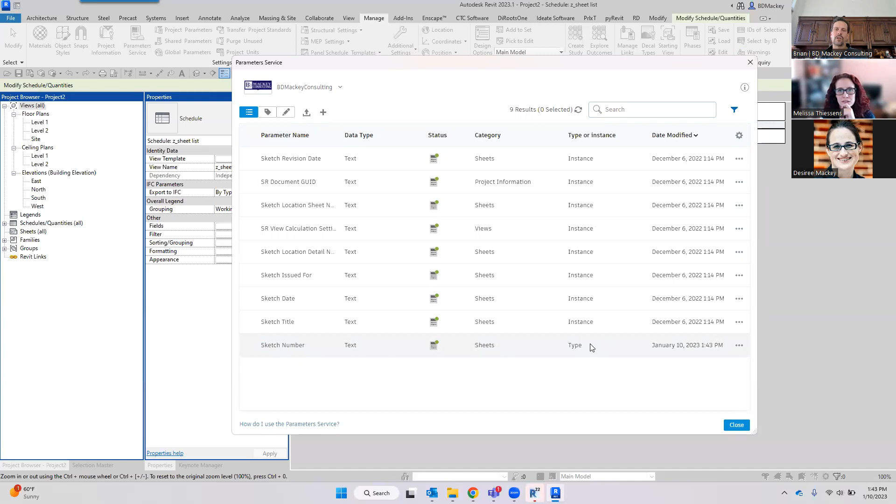Last time I checked, I wanted to go grab this one. I can change it, but then it's changing it globally. Next time I need it, I've got to change it and bring it in. The next time, I've got to change it again and bring it in. So I'm constantly changing it back and forth, and that just seems insane to me. And this is just editing it. So I've edited it here.

This doesn't actually bring it in to your, no, actually you can. Yeah, and it says, okay, these are the ones in this particular project. So that doesn't help me out at all. Yeah, so you can change it here. But again, it's one of those things, I don't know. I've got to look at this. I'm actually going to be talking to some of the developers on this in the next week or so.

And a follow-up: does it definitely stay type or instance? It used to be. Jason just showed me I could change it. Before, once you created it, you couldn't even edit it. It was crazy. The one nice thing about the parameter service is one of the options when you're in there is you can import your own shared parameter file and it'll theoretically bring them all across.

But if you do that, it automatically brings in all of those shared parameters as instance-based parameters, not type-based. So if there were some you wanted to be always type-based, you would have to go through and manually manipulate that. So yeah, instance. Now this one got moved to type because it's type.

Yeah, it's installed. You do not have to be part of the beta. They're calling this, what do they call these, Melissa? They call them pre-release somethings. So it's in the program for anybody to be able to go use and play with. And they are looking for people to give them input on this stuff.

I know they sent an email like 2 weeks ago. Hey, have you played with this? Do you actually want to check preview technology? Thank you, Jason. Like, do you want to play with this? Do you want to come in and check it out? They've actually been doing surveys and stuff for people too.

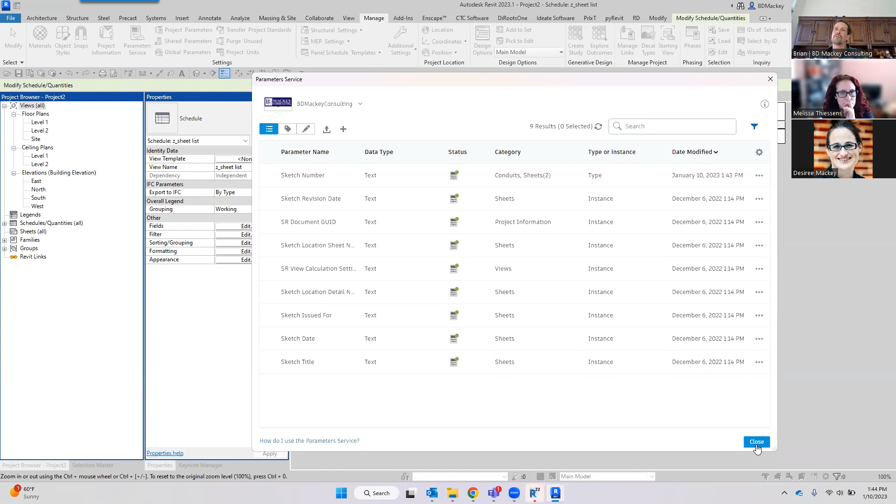So yeah, this parameter service is technically for everybody. It is natively installed. It's just like there's some MEP tools that you can get installed as well, which are not beta programs. They are preview technologies; they want more people to give input on it. Yeah, wasn't the Load Autodesk Family a preview technology at first too? Mm-hmm. Yeah, I believe that one was too.

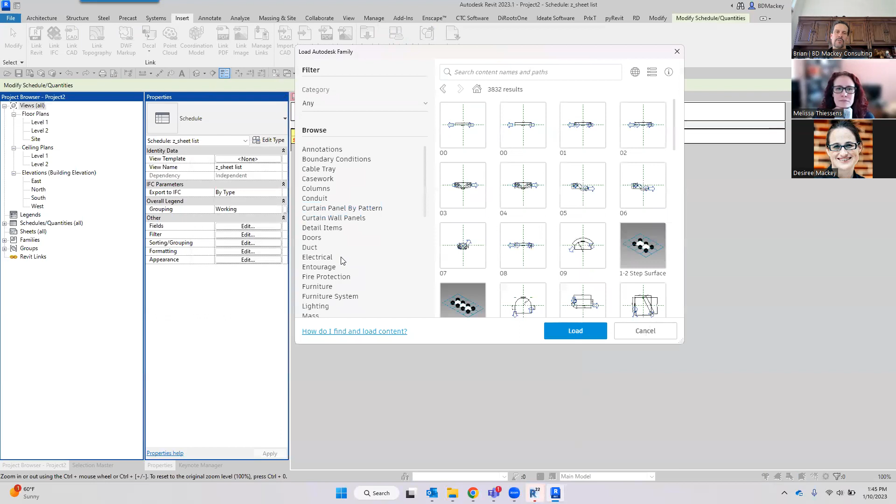I have to say I hated that until I was teaching classes at the community college. And then it was like, oh, okay, now I can go get some of their out of the box crap. Yeah, to me, I didn't like the UI on this. You still kind of have all the same theoretical folder structure, etc. over here, but I don't know.

The one time I was using this, it got into a slow thing. I do like all the pretty little previews they give you of all the stuff, but it was taking a little bit longer and the search wasn't working the way I wanted. It's a little bit better since the first release. You can also toggle lots of views and names.

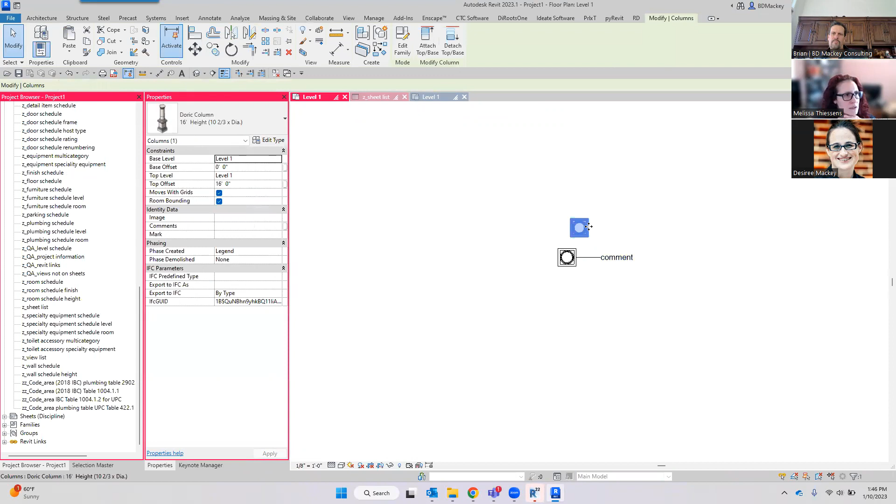Cool. So we got a couple more questions. What other questions we got here? So here's another one with tags with multiple labels. Yasser says, I had an issue with tags with multiple labels with breaks, that the top left or right alignment didn't work properly for them. Have you ever had such a problem? Not sure if I totally understand the question.

So if I grab this and I say add or remove hosts and I go boom, boom, boom. So you need to put breaks, multiple labels in there. So go edit your family and add another label. Got it. Sorry, I was thinking of this feature, since my brain was on that still. Thank you for reading that properly, Melissa, and not just assuming what it said.

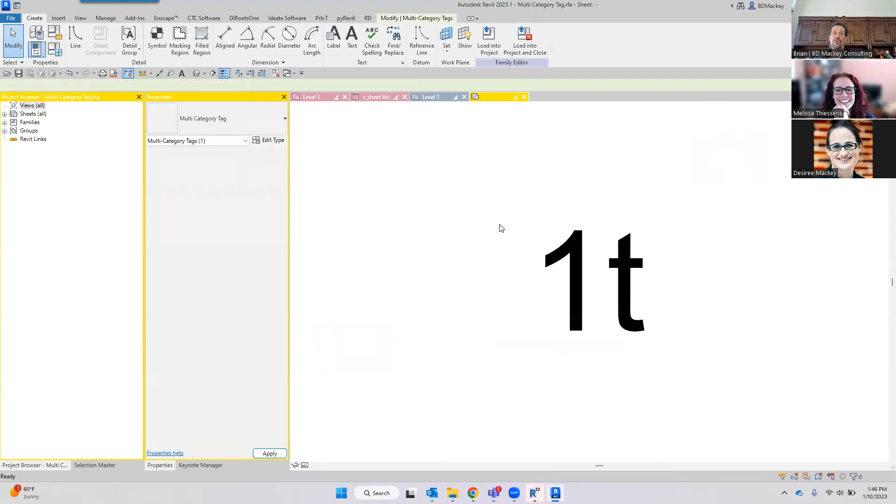So you're talking about when you edit the label and you're like, cool, I've got type mark, but I'd also like to have comments in here and I want to use the break. That's what I'm assuming is right, so let us know if we both read it wrong. And then you said you wanted to go to the left and to the top, and the breaks broke on you. One thing that might be breaking on you is if the width of your label box is too narrow. Could be a problem.

I think that was project one. We'll hope that was project one. Yay. And then we need to add comments to these. Does anybody else hate the fact they added IFC in 2023?

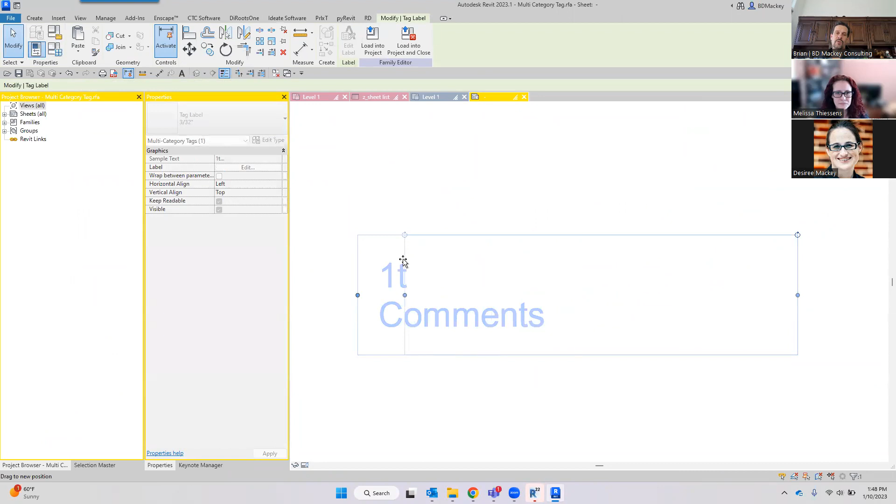So I haven't had issues with these being top and left justified, unless, like I said, if you come back here and this is too narrow. I have seen issues with this being too narrow, and then it looks like it's not actually breaking, it's adding the comments or whatever to the second line. All right. And then let's grab the comments of all these and make it something longer. Get my fingers on the right keys. Oh, I thought I had all four of them selected.

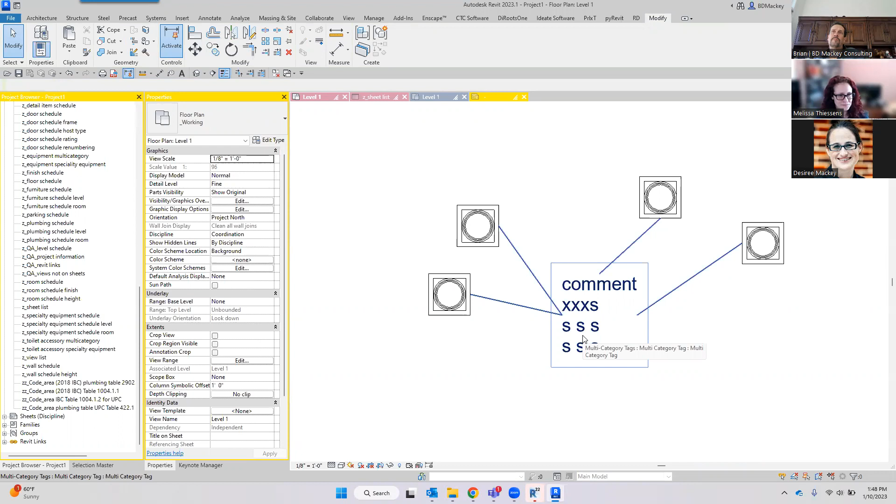So I have seen it do this where it looks like it's breaking and it shouldn't be. That's all I can come up with. Yasser. So hopefully that fixes it. Try playing with the width of your tag. All I got.

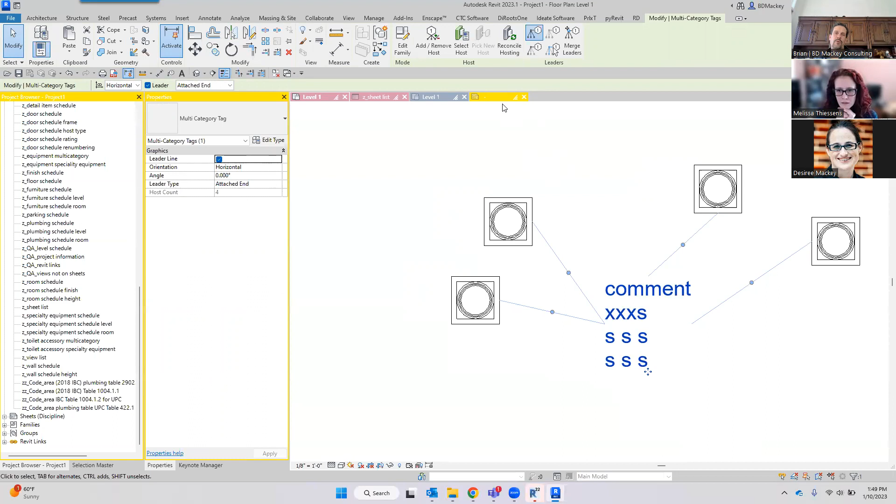We tend to use the stupid invisible line tags just to keep it right where we want it. Yeah, my only problem with the invisible line trick is, oh, I always wanted this in the center or whatever else. So you do go draw that invisible line.

That's when somebody says, oh, here's the invisible line, and I need it centered, so I've got to do this, right? Then when it goes to the bottom, the bottom's down here. So there is a way around that if you do type, just FYI, because this invisible line doesn't get seen.

But if you turn the visibility of it off, you can put a parameter on here. So if it's bottom justified, you can have a tag with a bottom justified setting. So we'll just do here and call it... I've got to create a parameter, not start typing, my justy.

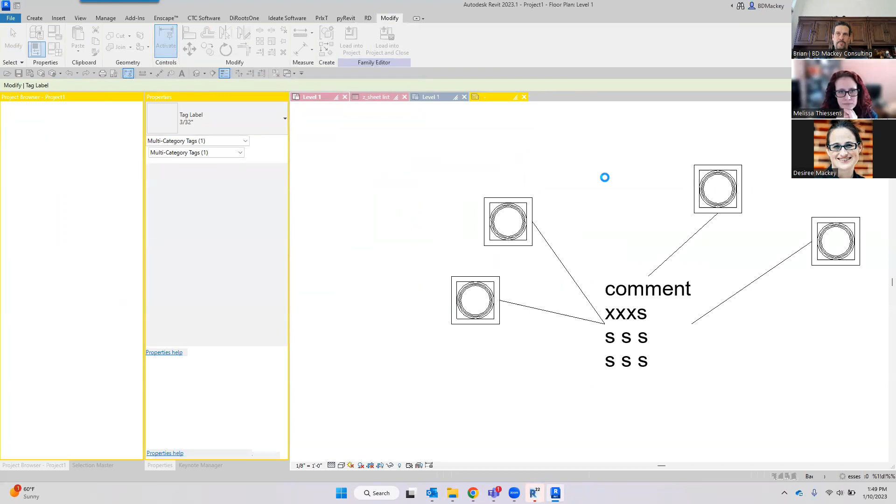And we load this back into the project, overwrite the existing. So you can see, get rid of these stupid comments and all these. Cancel, I don't need to save the project. I hit the wrong button. Let me get rid of my comments and make it something a little bit more reasonable.

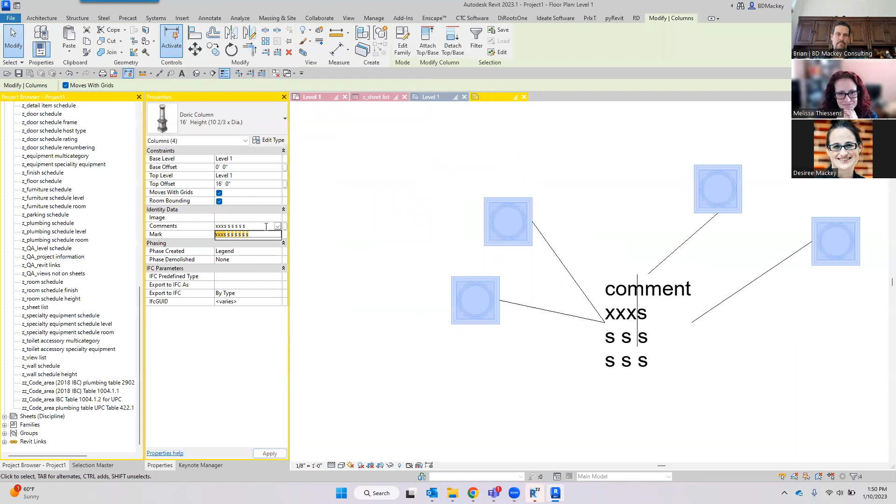So this tag is going to sit there, but if I go in, you can see it's right below the X's here. If I go in and say edit type and make that not visible... oh, I thought that was going to do it. Oh no, I do, yeah, I thought that's how I did it. I'll have to remember what I've done to that, I'll have to open up some old tags, but yeah, there's a way to get it to adjust.

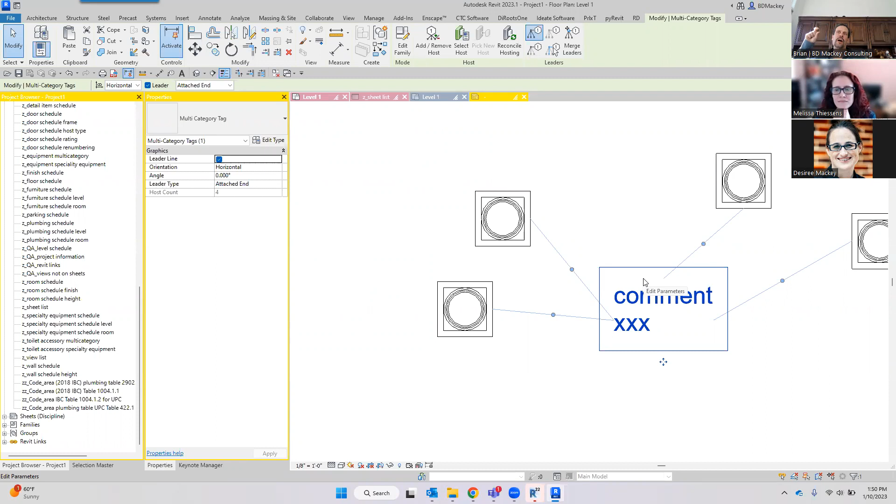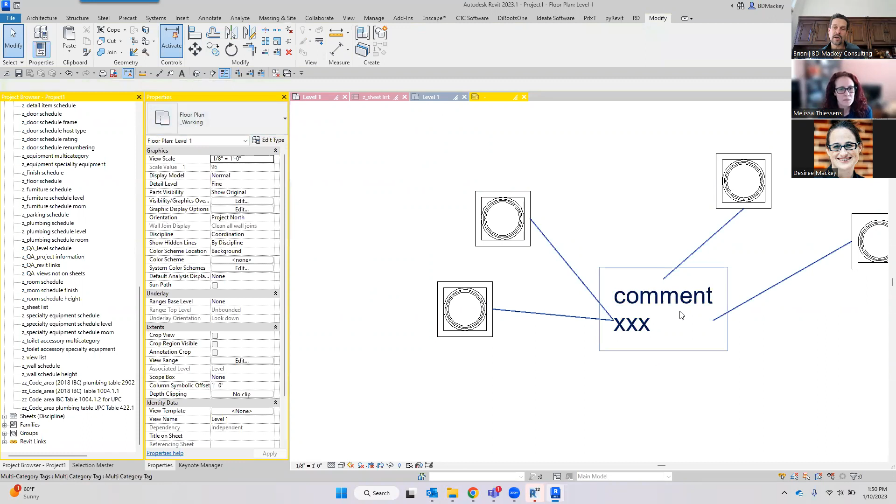Oh, I add a parameter to the length of it. So you can add a parameter to the length of the invisible line. If it's bottom justified, then its length becomes like 0 height, or barely any small height for this. If it's bigger, then, you know, I actually parameterize the length of the line for if it's top or bottom justified. And then I have duplicate tag types, like here's one: left leaders, right leaders, bottom leaders. It's stupid.

Beth is saying you could check the wrap only between parameters option there. Yes, there is that too. So if we select this - thank you for the comment, Beth - we grab this, there is the wrap between parameters only button here too. Check that as well when you start looking at it.

So many fun things we have to do. And if they would just literally give us a point to tell it where to connect our leader. Yes, leader points: left, top, bottom. We have flip controls, and we've got 4 flip controls. I would love to have 4 leader points: a top leader point, a bottom, a right, and a left. For sure.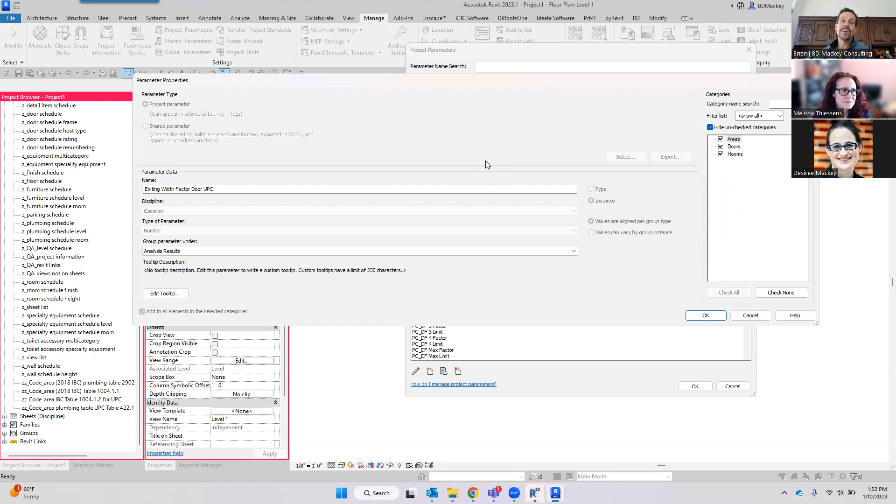The way to get them in the right order is to put them in Revit in the right order. So if you want one first, you've got to load that project parameter first. If you want the next one second, under analysis results, you have to load that one second. They have a display order like most things in Revit, all based on the way they are loaded. So if you add parameter 1 through 10 and realize you needed to insert one between 5 and 6, you have to go back and delete 6 through 10, re-add the new one you wanted between there, and then add those back in - which isn't actually functional or realistic, because most of the time those are already in schedules, and if you remove them, you lose them. So yes, you can, but in reality, no, you're just stuck.

I had one client pay me to do that. They said, oh, I needed those in order, could you please re-get those? It's just driving me crazy, they're not in order. I'm like, cool, sure. So I moved everything, redid it, and fixed it all this week. I mean, I know my OCD and my type A personality gets me sometimes, but it's something like, no, I'll just learn to deal. I'll take medicine for that - they've got drugs, and by medicine, I mean I'll drink tequila.

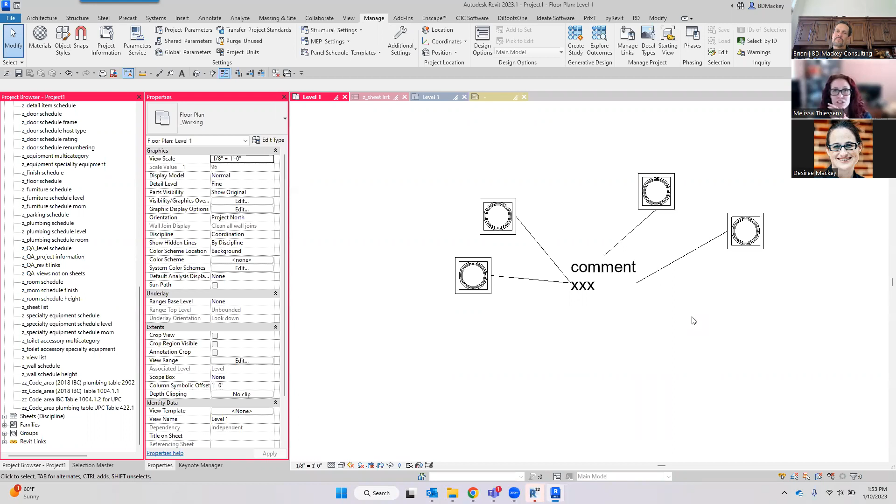Alright, let's see, Rowan's asking if you could do a quick demo of the Ideate Tools annotation tool. Yeah, this is actually a fun little tool. So on the Ideate software, one of the new features they have is this annotate tool. I'm just going to come in here and run a dimension from this one to this one and deliberately put it over this. The Ideate annotate tool - I don't know everything about it, there's a lot more it'll do than what I know about, but the best thing I like to call it is it's clash detection for annotation.

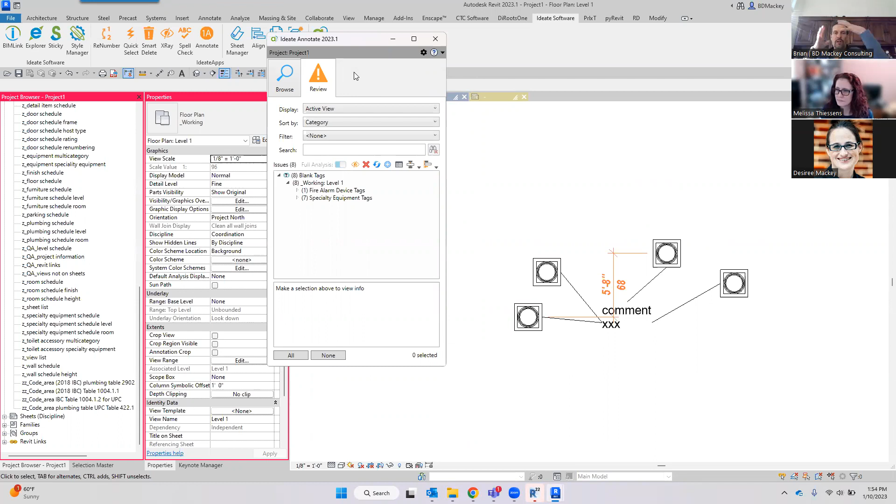Couple things that always crack me up, and they still are working on some things. I know we've got a couple structural people here. It does not work well with beam system tags or span direction symbols, because those theoretically expand the entire size of the object. But it will start coming through here, and I love this - I don't have any of those things. I don't have specialty equipment tags loaded in here. But a lot of times what it'll start doing - and it's not working right now.

Let me try it again with a piece of text. Again, it's gonna be one of those things that I can't get it to break right. Try it again, ideate, but you can start running this, and it does a pretty good job. It's not foolproof, it doesn't get everything at this point in time. But it'll start telling you, oh, you've got this overlapping that. And of course, it's not working at all for me.

Active view, sort by category, filter none, tags, dismissed issues. I don't know why it's not working, it should be working for me. Let me try the refresh just to see. I don't even get why it's telling me I have 8 blank tags in here. I mean, this is just the tag category turned off probably, but...

I don't know why this isn't working, it should be working. But usually it'll come in here and start to tell you that, hey, by the way, you've got this text or this dimension over these other types of things, etc. And it's actually working pretty well. I really like how it's getting set up, and it's been pretty great. I've actually run it on a couple of my clients' projects, and it's funny - they're like, holy crap, I thought I had organized and gone through all of this. And it's like, here you go.

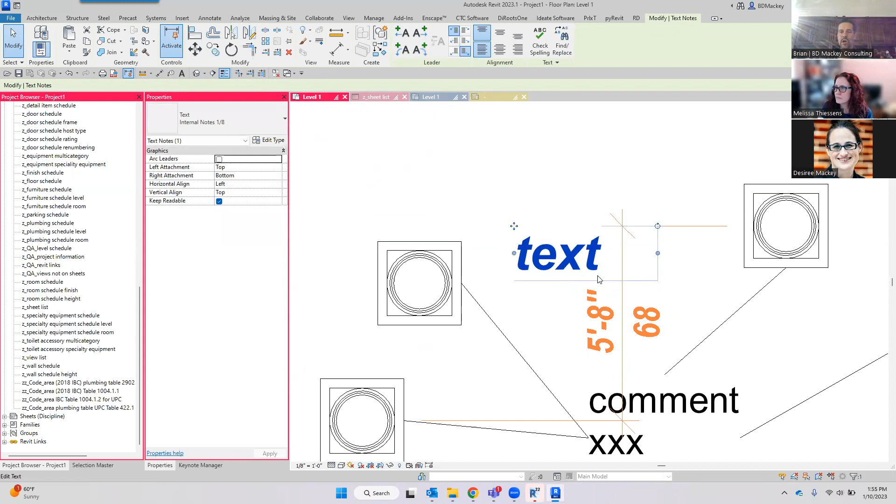Now, with some of it, just like anything else, it's actually looking at the bounding box. So if I had this here and it's technically still visible or still readable, it might say, oh, since the text box goes out to here, this is a clash - but I'd still rather it do that than not come up with it. I really don't get why this dimension didn't overlap that, but kind of one of those scenarios. Yeah, it's a pretty cool tool.

I do tell everybody, if you have the Ideate tools, look at this. This came out in the latest release, or the release around AU last year. So go through it, try to run it. And it does other things too, I'm just not 100% sure - you can say, hey, I want to distribute things horizontally, vertically, I want to justify all these to the left, right, etc. I think there's even an option to view all of the issues and then export them out as well. So some other tools in here that I haven't totally gotten into.

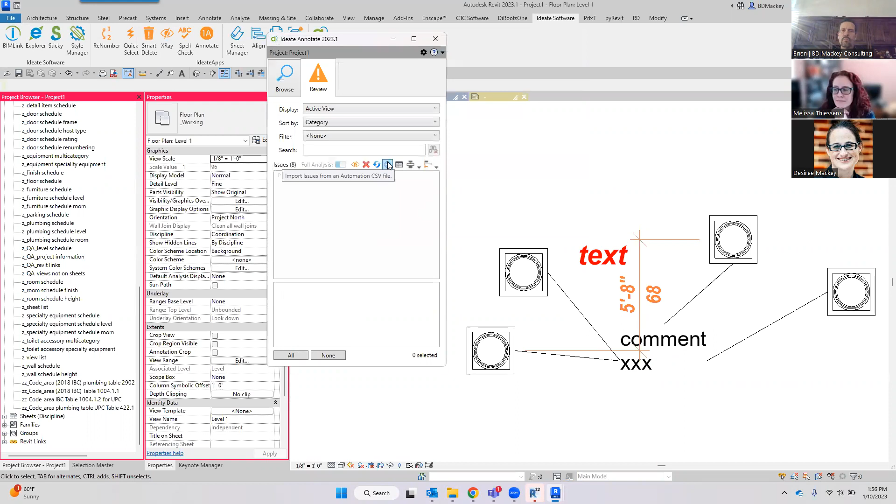Haven't really gotten into a whole lot of other things, but it's pretty cool. Like I said, I've ran it on a few of my clients' projects just to see, on real actual views with a whole bunch of documentation, and it's like, yep, these overlap. So I have been using it - it's pretty fun to use.

Well, it's right at that last time of day where someone says - you look like you've got an angel visiting you. Oh, do I have a halo behind me? Yes, yes. Oh yeah, can we fix that? One last question up here. There you go, no more angel.

You got this. So, how do you fix a door that is placed in a sloped wall? Will the opening follow parallel to the door, or will it angle correctly for the core?

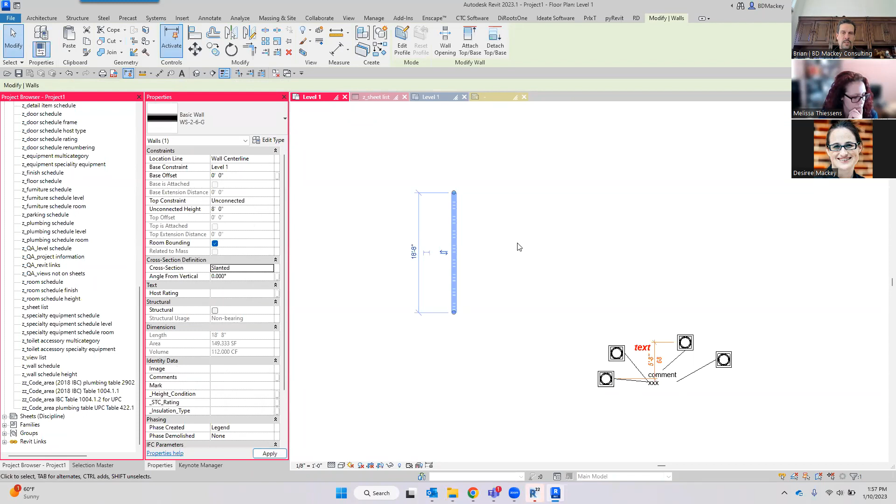The opening will - well, first off, the door or the window is going to be vertical. Let me show this - this wall is sloped, so this is going to be slanted. Sure, we'll put a 5-degree, or 4-degree, bevel on there. We will go put a door in here.

So a lot of it depends on the type of door you're putting in as well. But if I go back and look at this in 3D...

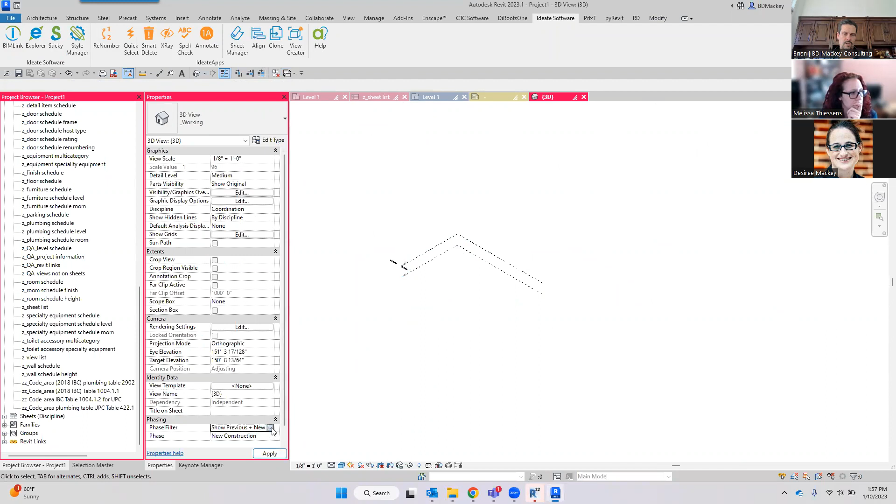What do we got? A phase thing here. I'll just get rid of that and say none, because I put it in the wrong phase. So if I have a slanted one over here, this door is going to be set to be plumb, and the opening will cut, but the opening will also be associated to the door.

If you put a window in here... why am I not finding the host wall? Is this window set not to be? Oh man, I jacked with my window family and reloaded it in here for a client the other day.

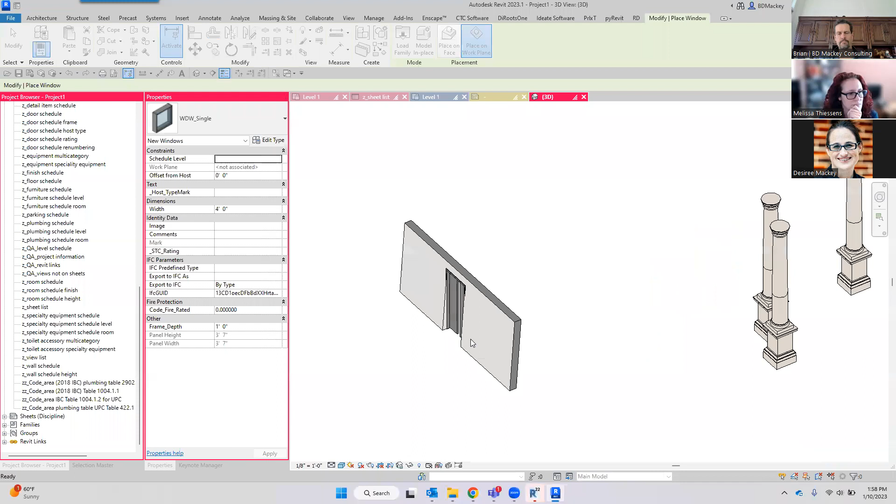So you grab the window, and again, you can kind of see it is plumb when you start looking at it here, when the wall is slanted. I believe if you edit that family and get rid of the vertical, always vertical option, I think it follows the host, but I can't remember because I don't do a whole bunch of these.

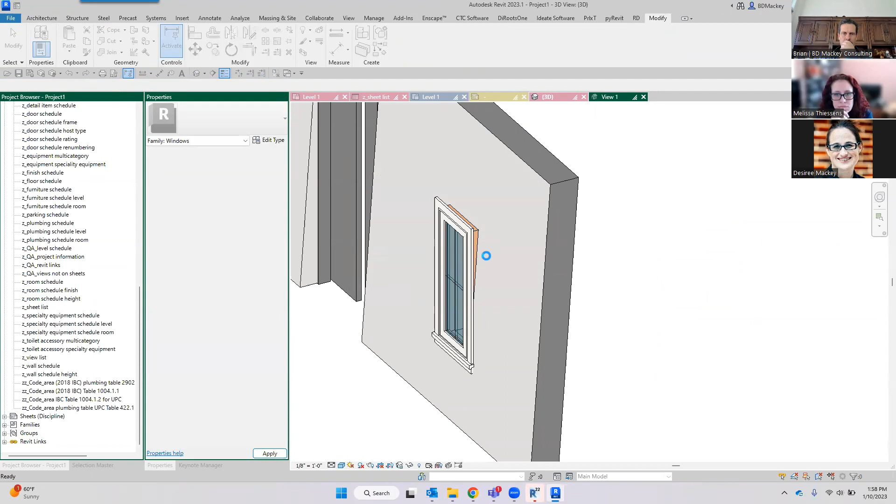Load in a project. Yeah, like I said, I think they stay vertical even if that's unchecked. I haven't found one that will follow the slope and do that.

So if you really needed one to follow that slope, I think what I've had to do is create it as a face-based window. So it'll still cut the opening and then it works just fine. But yeah, I haven't found a way... oh no wait, I lied.

There's a checkbox in properties. I know this. There is orientation here. It's slanted. I knew they worked on that.

So if you go in here and say that's slanted, not vertical, you know, because we have slanted sliding doors, and then we cut a section through there with the section box.

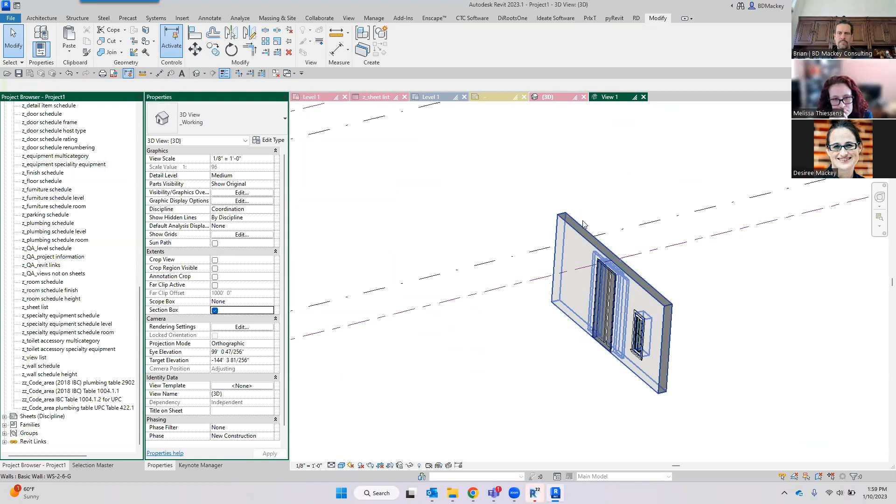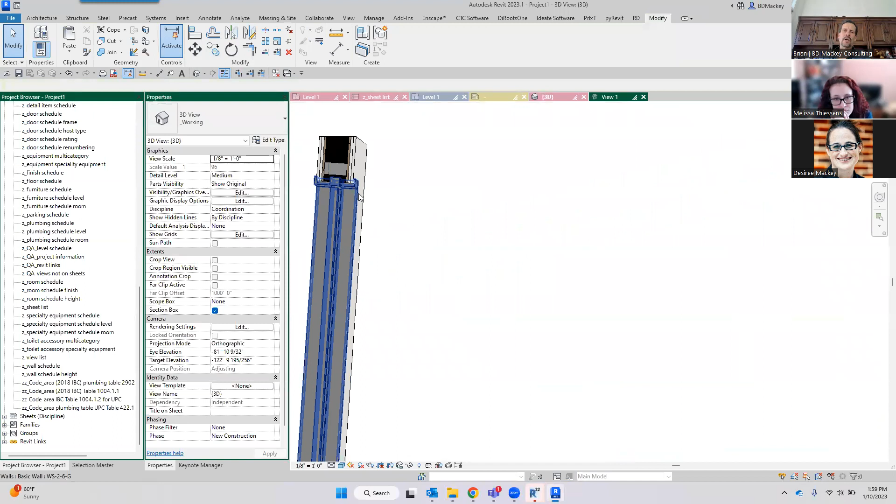And then if you cut it through here, it does go parallel, perpendicular to the door. So the opening stays to whatever it's set to if you're using the opening command. So you can see mine is on a slant. My sliding doors are going to be grinding and scraping, but hey, there you go.

The downside I found is since there is an opening in there, if you're truly trying to do this with a door, it will leave that little bit of wedge underneath it. So you might need to edit your families to have the openings expand if you're slanting them to go lower, because it looks to that ground plane and says, hey, I'm on the ground here, that's where I need to go, so it's sloping up.

So if that's the case, you need to edit your families and give yourself an additional opening. If you wanted the casing or frame to go all the way to the ground, you might need to do something custom there too. But yes, there's that slanted vertical option when you get into it, so it stays with the door.

So hopefully that answers Anonymous's question. Other than that, we're at the top of the hour. Look at that, perfect timing. That never happens on Revit Radio.